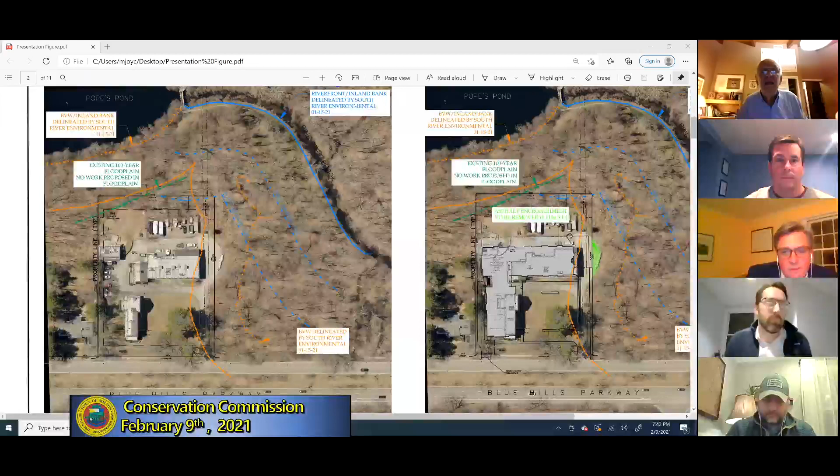We don't see anything, or I don't see anything. It should be popping up in a second. Hold on, how are we doing? Coming up, it's coming through. There we go, yep. Oh perfect, good, okay.

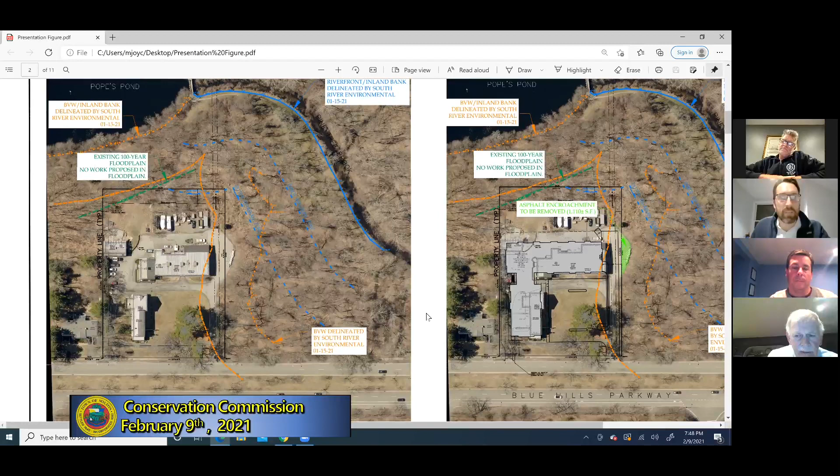You're all night, right? I don't know whether it's Michael or John, but can one of you respond—this isn't necessarily a resource area question—do you know what the groundwater elevation is on the site? So we did perform test pits out on the site. The groundwater elevation...

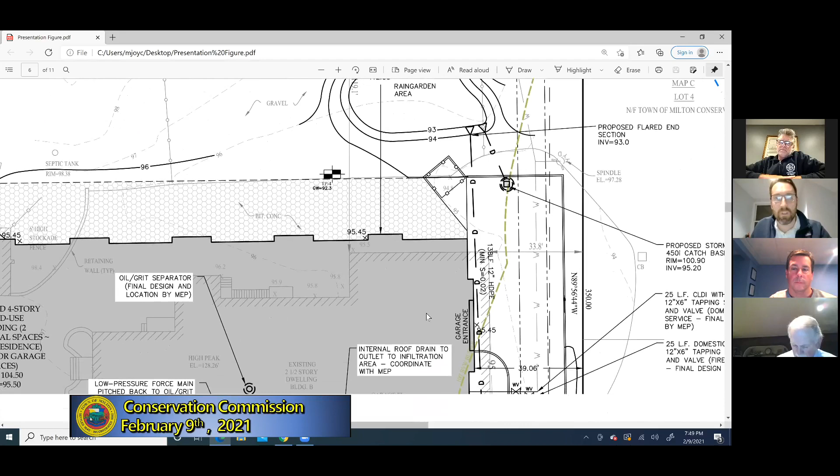It varied pretty significantly depending on where you were on the site. For example, in the back it was elevation 92, about 4 feet below grade, at the rear of the property. Closer to the street, it was roughly between 4 and 5 feet below grade. Actually, it was fairly consistent in the test pits we performed.

So that's those test pits there that we're looking at, the box, the hatched target looking areas. We performed 4 out there, 3 in the front and 1 at the rear of the building.

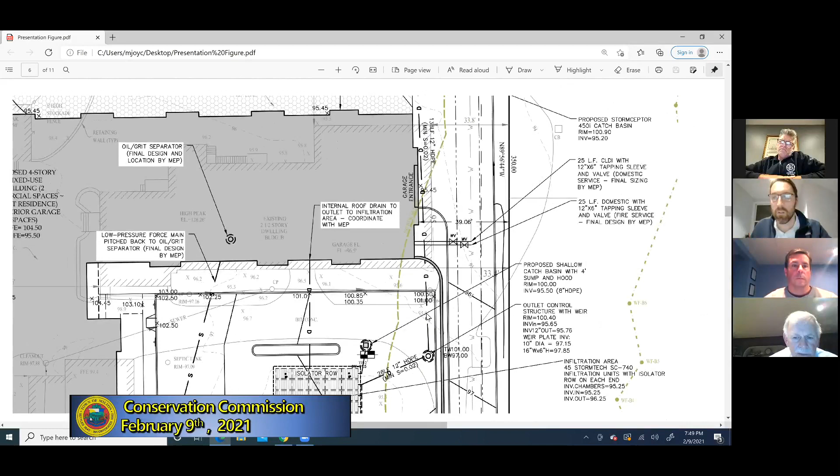If you like, I can give you a narrative of going over what's proposed and what's existing from an engineering standpoint, and the work we're doing in the buffer, if that's okay with everybody. Sure, yes. Excuse me, do I remember there was a hydrological section in the document?

Yeah, so we did do a full stormwater report. We're running in parallel with our notice of intent application. We are also in front of the Zoning Board of Appeals currently. We've had 1 hearing with them, and we haven't received any review from the engineering department or a peer review yet, but we're anticipating receiving those in the next couple weeks. But we did do a full stormwater design, which I can touch on as we go through the presentation.

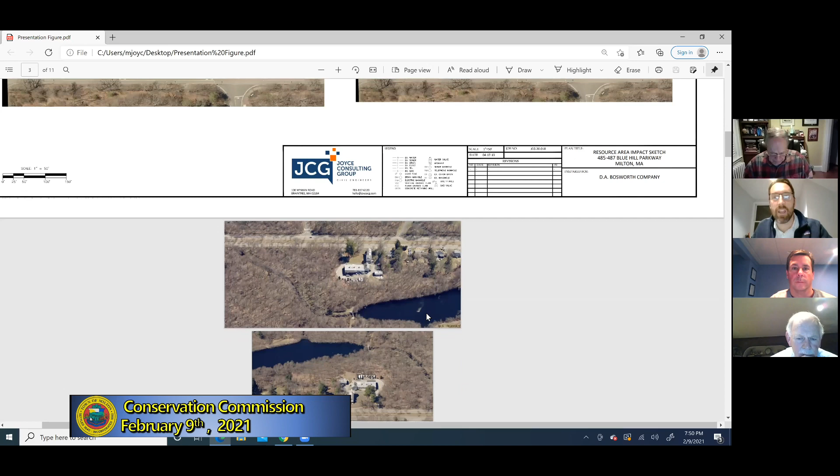It's Appendix C, I just relocated it, the hydrological model. Yeah, they're pretty much at the end of the application there.

As Scott and John touched on briefly, with the existing 2-acre lot at 485 Blue Hills Parkway, there's 3 existing buildings on the site. The site also has driveways surrounding the existing buildings. There's 2 access points from Blue Hills Parkway, one on the northern side, one on the southern, with driveways surrounding the buildings. The site has a high point at the front of the site, and it gradually slopes to the northwest corner.

There's no real existing stormwater improvements, with the exception of a catch basin to the northwesterly corner. It's a leaching catch basin, it doesn't really provide much value from a stormwater management standpoint. The stormwater flows over surface and then ultimately ends up on the conservation land associated with Pope's Pond and Pine Tree Brook. There is one residential abutter to the south, and then the remainder of the lot is abutted by the Milton Conservation Land and Blue Hills Parkway.

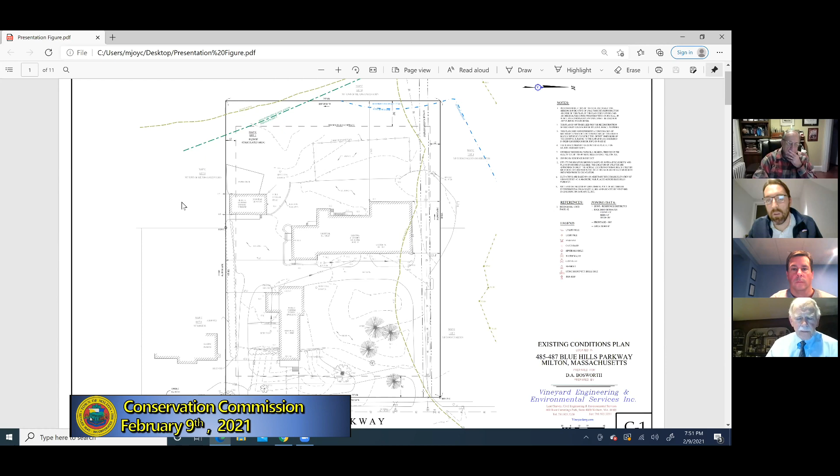So I have a few pictures. Well, you saw this one here. Can you provide some detail on the existing uses?

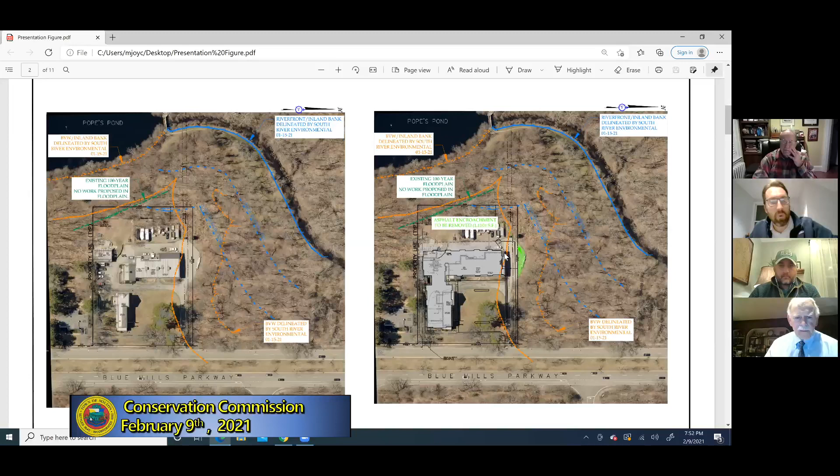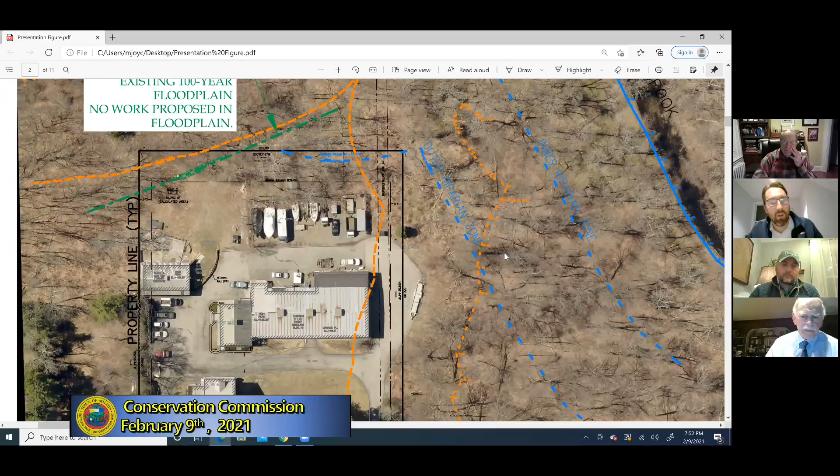I can provide not much background. There are residential buildings there, and then there's a large warehouse to the back. This is the warehouse here. It's my understanding that it used to be an ice warehouse back in the day, where they used to take the ice from Pope's Pond, bring it and store it in the existing warehouse, then throughout the summer transport it to residential dwellings for their coolers, refrigerators, so to speak.

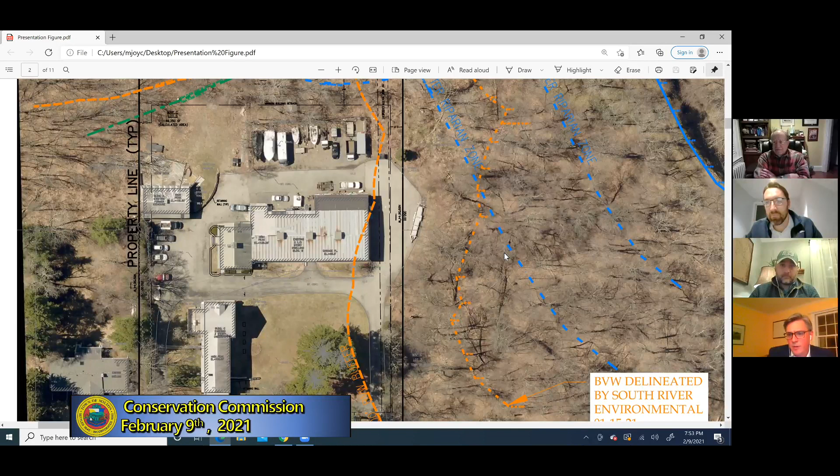Ice boxes, exactly. So at current day, I believe it's used more as a storage for equipment. Scott, I'm not sure exactly, do you know any more about the use of the site today? I know in the past it's been used as a residence, and I don't know. I know there has been residential use. Charlie, maybe you could chime in on that. I'm not exactly sure what it's currently being used for.

Yeah, the building that's closest to Blue Hills Parkway is still being used for residential use, although there's only a few people in that part. The large old barn is storage at the present time. The building to the left of the barn used to house office space. That has since been vacated.

In the building to the rear left of the property is an old pool house that was, the best we can tell, constructed sometime in the late 50s or 60s, but there's not a lot to it. Now, the barn, the garage, although there may have been some transportation of ice out of that barn, was strictly used for carriages and equipment to move the ice around the town. The actual ice house itself was adjacent to Pope's Pond, essentially on the bank of the pond, to the west, a little bit south, and it was a much larger building, well over an acre in size.

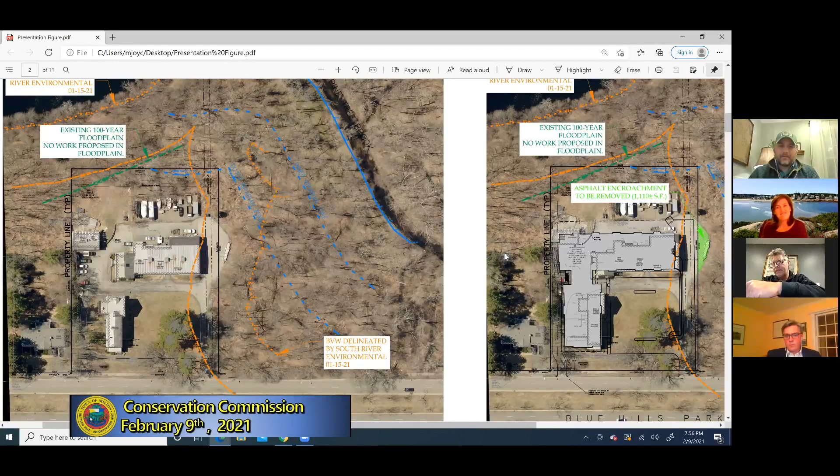Sorry, I have some background noise. I apologize. Is anyone else having trouble hearing Todd? I am, I can't hear. It sounds like there's background noise. Yeah Todd, it seems like there's something wrong with your audio. Honestly, I wouldn't have even known you were talking if your name didn't pop up on the screen. So to continue, my apologies.

No oil or hazardous materials issues or the need for that you've identified? We have not identified anything. There's the heating systems for the buildings themselves, but we haven't found anything below ground.

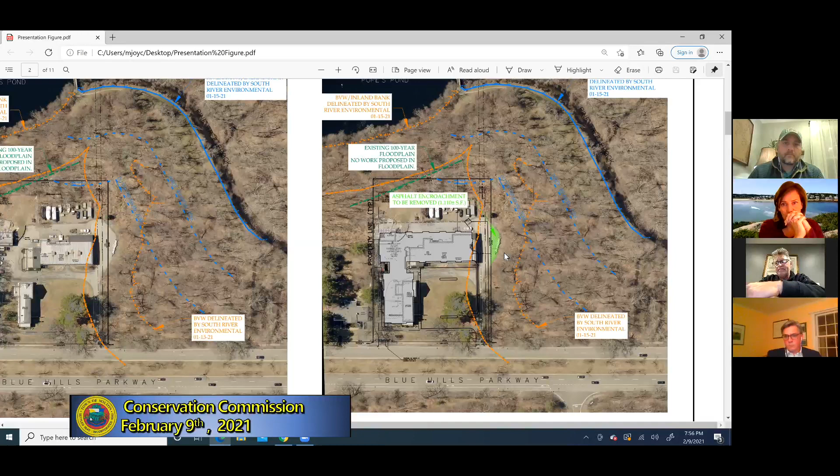Hans, do you recall when we were out there most recently, probably a year ago or more, at the back building? I know there were a lot of fill pipes on the outside, they looked like oil fill pipes, separate ones. You remember that? So I do, John. This is Steve. Yeah, I remember fill pipes. You and Ingrid were there, and then I think we were there in twos - I was there first, then you and Ingrid came. I think I was there with Judith. And I just remember there were fill pipes at the building, and I didn't know if there was any kind of a 21E floating around that had been done at any point in the past.

But there was an oil company there, wasn't there? The McKeans ran their trucks out of there for several years, John. I think it must have been 10 or 15 years anyway that they ran their vehicles out of there.

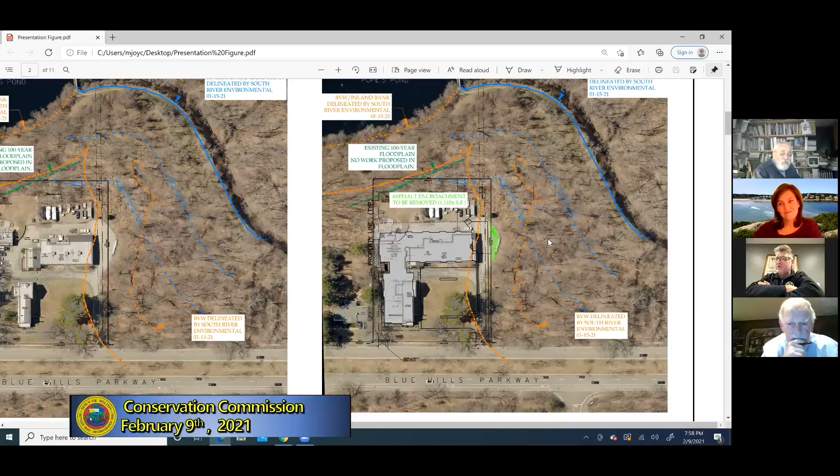I haven't seen any oil fill pipes that would fill underground tanks, if that is what you're suggesting. There are pipes on the outside of the building that fill the inside tanks, but we have no plans and no evidence of underground storage tanks, if that's where the suggestion is the fill pipes are going. Yeah, no, I was just on the outside and I saw the fill pipes, so I have no idea what's inside, whether it's above ground or below ground. I don't have a clue.

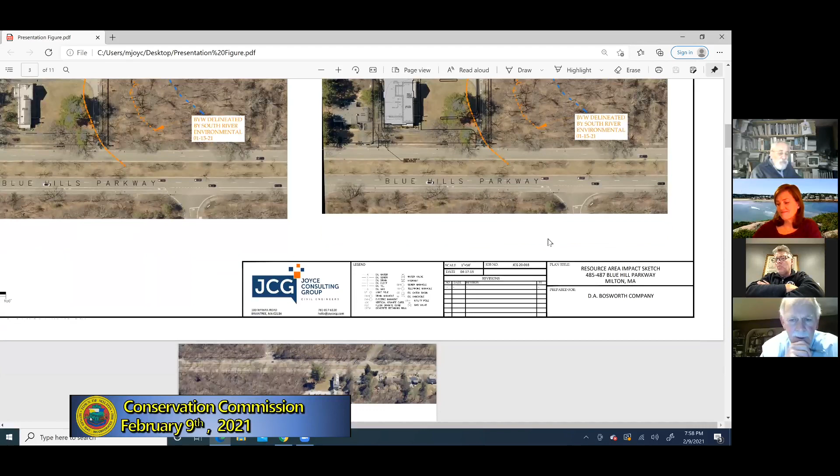Well, the tanks inside the rear building - there's several different heating systems in the barn, at least 3 separate heating systems, so they have 3 separate tanks at the barn itself. And how big are those tanks? I didn't measure them, John, but they appear to be typical 110 to 220 gallon tanks, your typical residential oil tank.

Okay. Actually, typical oil tanks are about 275s. Okay, then I guess it must be 275's, Steve. I know I have one, that's why.

If I can take you back, the concern with potential oil contamination would be significant because of the water issues. One of the reasons I asked about the groundwater elevation was because I was interested in the detention pond, which would be at the northeast side of the site. I didn't know whether or not the groundwater testing, the borings - I haven't read in detail what the borings looked like, but my concern is whether or not the detention basin as designed would be sufficient to take the runoff as it's depicted in the plans.

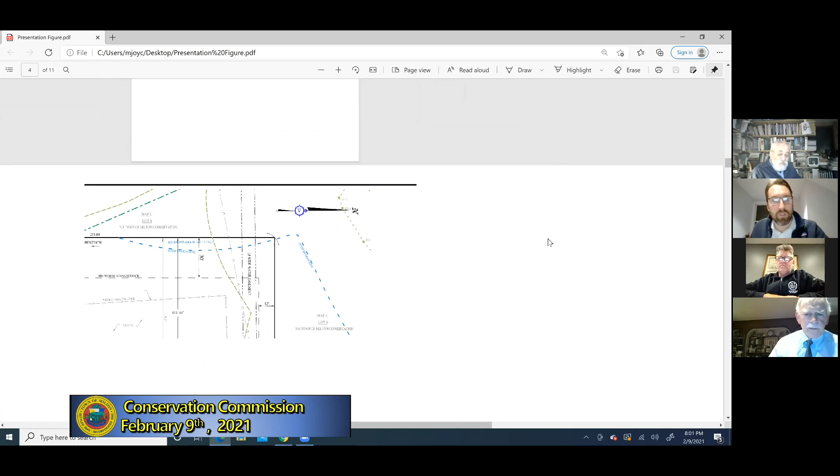So what we're proposing is to construct a 52-unit residential building. In addition to the residences, there'll also be 2 commercial or retail units at the front of the building. The proposed building will have 2 separate parking areas accessed through the same northerly curb cut that's existing. There'll be parking in the upper area, and a driveway that accesses a below-grade garage level entrance holding 34 interior garage spaces. So we'll have 2 separate areas of parking, one above and one below, both accessed by this curb cut off of Blue Hills Parkway.

The driveway will basically follow the same path as the existing driveway. However, there's this encroachment of asphalt that goes over the Milton conservation land. That'll be removed, and the driveway will be pulled off of the property line, about 4 feet off at the front of the property and 7 feet off at the rear. So that asphalt will be removed from the site, about 1,100 square feet of it.

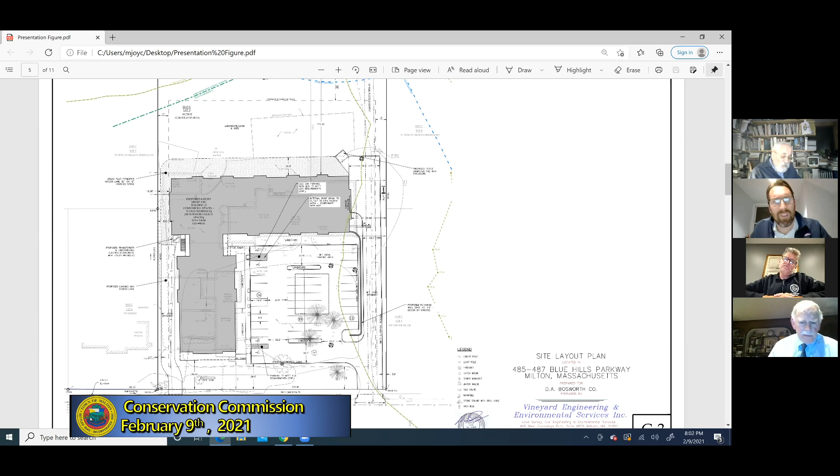So in order to design the site, what will be the setback after it's pulled back? It'll be about 4 feet from the property line at the driveway and about 7 feet back at the rear of the driveway. So that is proposed.

I'm sorry, I thought you meant that other than the encroachment, that's what the existing condition is, but that's the proposed condition. It pulls back - you can kind of see that the edge of the driveway runs, existing is kind of where the cursor runs, and it bumps out pretty good. I imagine there was just creep over the years of the trucks swinging around the garage. They probably took the turn wide, and historically that driveway just kind of expanded as it was being used.

So can I interrupt and just go back a second to the parking? You said 34 interior spaces below grade, right, and how many exterior spaces? There are 34 interior, I believe there's 43 exterior spaces.

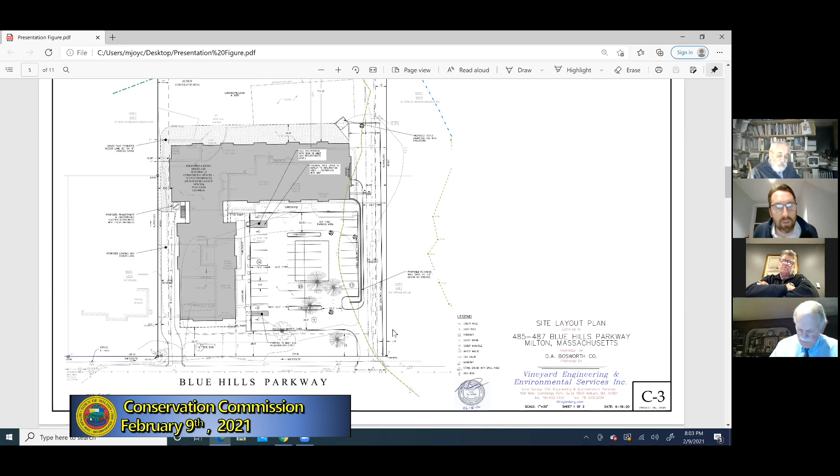All right, and the interior one, what's the bottom? I mean, how deep are you going to go? So the proposed garage slab will be approximately the same as the existing garage slab, about a foot lower, so it's more or less the same elevation that's existing. We're trying to work with the existing grade as it slopes to the rear.

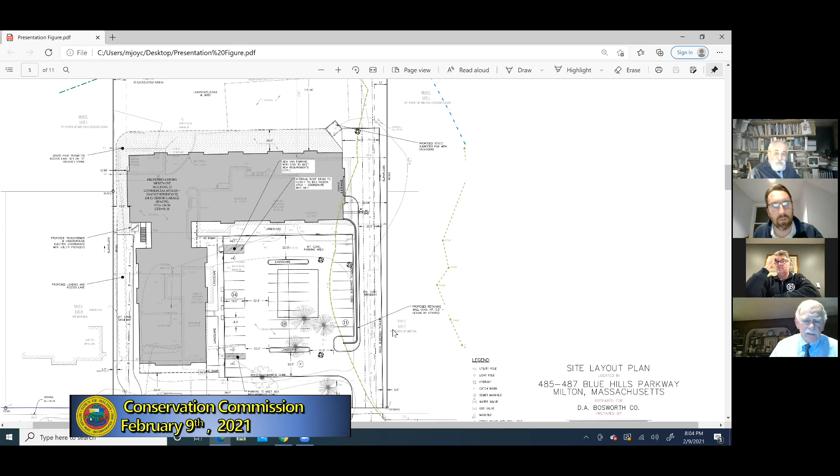So there'll be garage under, but only in the portion that's parallel to the street - the L portion of the building that's parallel to the street, there'll be garage under on that. And then as you move forward, I believe there's a half basement. Is that right, Charlie, on the front?

Well, the portion that heads towards Blue Hills Parkway, that's full basement, but it's residential basement, meaning some of it is for the commercial space. And then the other area will be for mechanicals. So you'll have parking essentially going from north to south in the L, and then east to west, that section of the building will be for mechanicals and for storage for the commercial space.

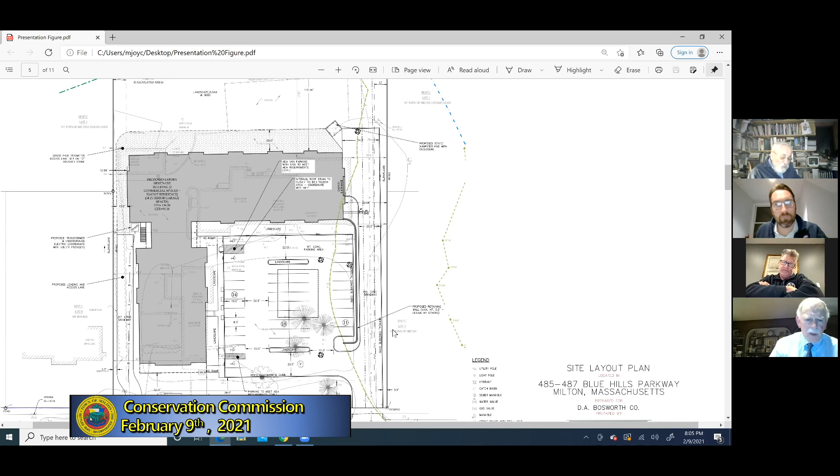Where is the commercial space? I know you said front, but I don't know whether you mean front closest to the parkway or front as in facing the parkway. Right where he has the cursor, John, we have 2 commercial spaces going right in the front of the building. Understood, thank you.

And how big are the commercial spaces? I believe it's about 2,000 square feet total between the two of them, 2,500. Yeah, we're about 2,400 combined. Now, it may end up being one commercial space, but it's cut into two right now in the design.

Are they both at ground level? Yeah, so they will be at the elevation above Blue Hills Parkway. So Mike, can you pull up the elevation in front of that building? If you can just zoom in on the front of the Blue Hills Parkway side.

You just mean on the plan here? Yeah, so the elevation - you'd come off Blue Hills Parkway, and Blue Hills Parkway is around 100, I believe, and finished floor is roughly 104, 105. So it's about 5 feet higher than Blue Hills Parkway.

Okay, and what type of commercial do you anticipate being in there? Well, that's a long way off, but our hope was that we would have some sort of gourmet coffee shop, sandwich shop, gourmet small market type of thing. We have spoken with at least one interested party, but quite honestly, that was before we got hit with the COVID mess, and I think it would be premature to promise anything until we know how this all ends up.

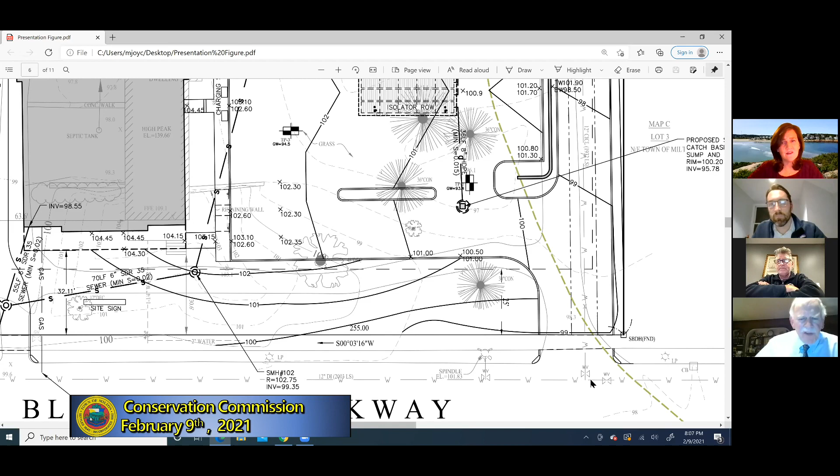Of course, but how do you figure your parking? Are you relating it to the 52 residential units, or are you relating it to both the residential units and the customer population for the retail outfits? This commercial space is so small, John, that the estimate is only to need 4 to 6 spaces at most for the commercial. So it's not really a marketplace as we would think of Milton Marketplace - it's a coffee shop, gourmet sandwich shop type of thing.

And how many parking spaces total are in the lot? We're roughly 42 in the lot, and I think we're in the 30s in the basement, Mike, right? 32, 34 in the basement. 34. Okay.

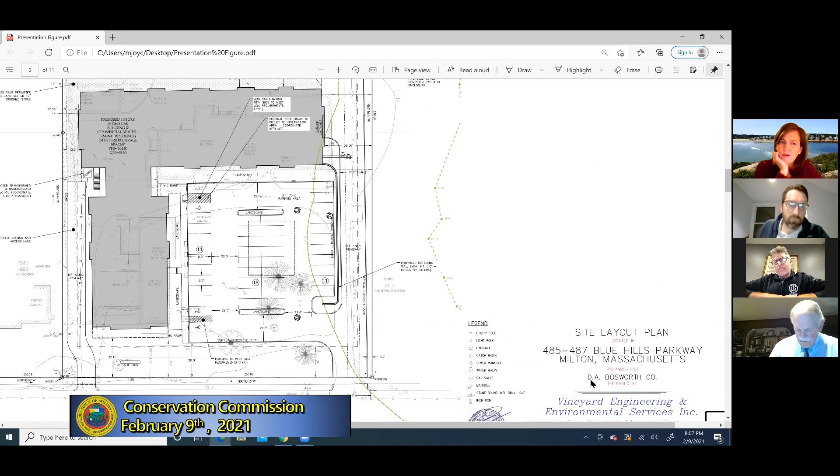And we have charging stations in the exterior parking location for EV vehicles.

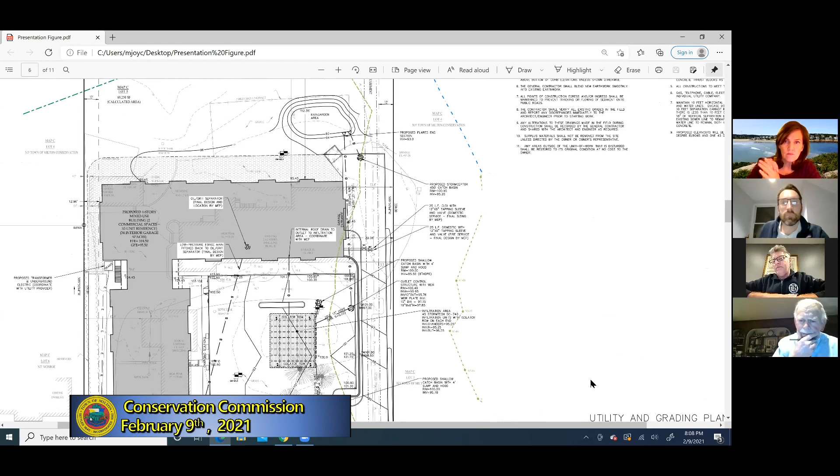Oh, cool. So is the number of parking spots compliant with the planning board regulations? Well, this is a zoning board approval process. But we have worked with the ZBA and the planning board, or the select board, and with Mass Housing on the volume of spots.

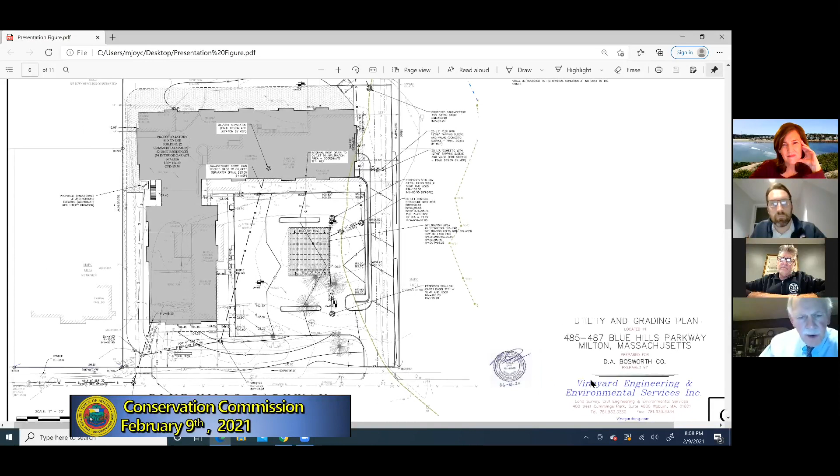Yeah, that's a concern, because if you get pushed on your parking, you're going to have more impervious space. Right. And my concern is you've got 77 spots, if you're 34 interior and 43 outside, that's 77 parking spots for 52 units. And then where do the 4 to 6 go for? And 4 to 6 doesn't sound like a lot of parking for 2 retail outfits.

Are those 4 to 6 allocated to the retail spaces? Are they part of the 77, or are they in addition? Correct, they are part of the 77. We have the option to increase the parking under the north to south wing, the east to west wing, if required.

And where does the snow go? Well, we have a lot of room around the back of the building, the east to west portion, for snow storage. Will that have to be taken from the front and then moved to the back? Is that correct? That would be the assumption.

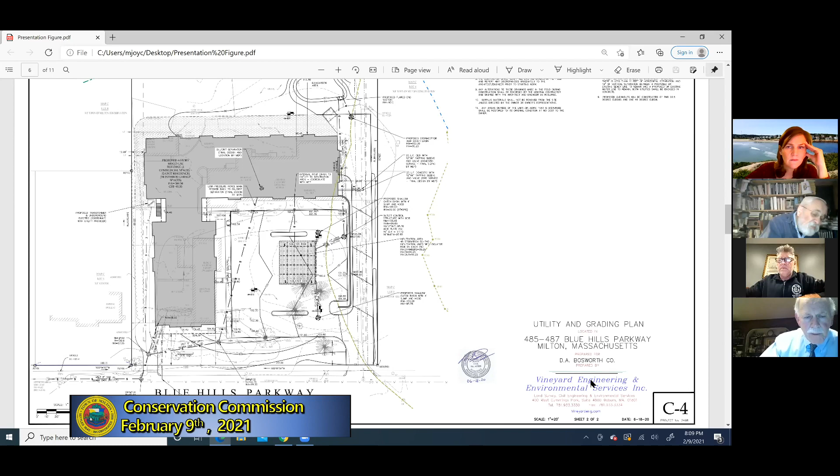Is there a reason why there's no parking behind the east to west wing? No particular reason at this point. If we had to increase or get some spots from back there, there's plenty of room.

But this parking volume count is something that we've worked with for close to a year now. So to be clear, on the back of the building, you're actually reducing the impervious area there, right? Yeah, if you noticed from the aerial views, there's the hard packed gravel area in the back here. That's all going to go away and be loamed and seeded under this plan.

Like Charlie said, there is the ability to potentially put parking in the rear here. I think we were trying to minimize the footprint and preserve some green space, but there is the opportunity if need be. I think there's been a lot of behind the scenes work that Charlie's done on parking, determining a number that they think will fit the development with Mass Housing.

I don't know if this is always true, but I feel like a lot of times in our designs we have a tendency to over design the parking, which is kind of a shame when it comes to open space and that sort of thing. But that's obviously not always the case.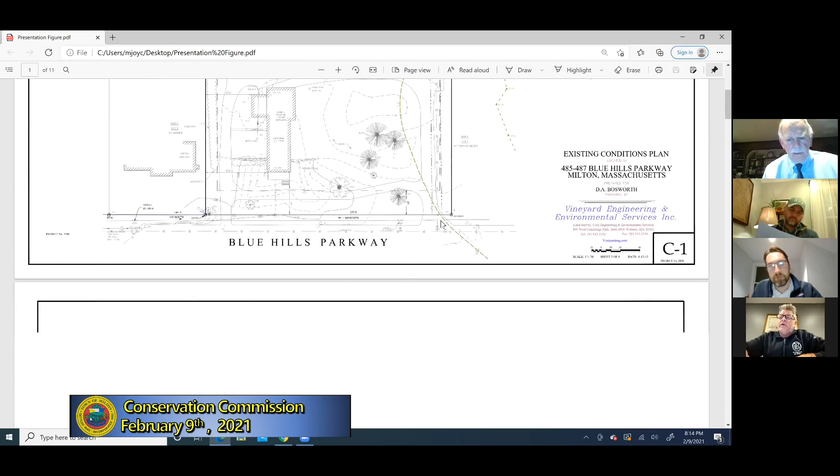What we would propose with another NOI. So Mike, stop where you are there. So along the Blue Hills Parkway side, the north property line, the first half heading east to west belongs to the Town of Milton. It is not governed by conservation. The second half of the run going east to west is governed by conservation, and the rest of the run out to Pope's Pond is also governed by conservation.

But when you say governed by conservation, are you talking about ownership? It's owned by the Conservation Commission, on the town's records. Correct. I just wanted to distinguish between deed ownership as opposed to jurisdictional. I'm speaking strictly to ownership. One side is the Town of Milton, the east side, and the west side is owned on record by the Conservation Commission, out to Pope's.

What we would propose, and this will be in a separate NOI, but for informational purposes we can discuss this. The north property line, the first part essentially owned by the Town of Milton, we would propose improving, come to the east a little bit Mike. That area there, we would propose parking for town residents and anyone that wants to walk out to Pope's Pond.

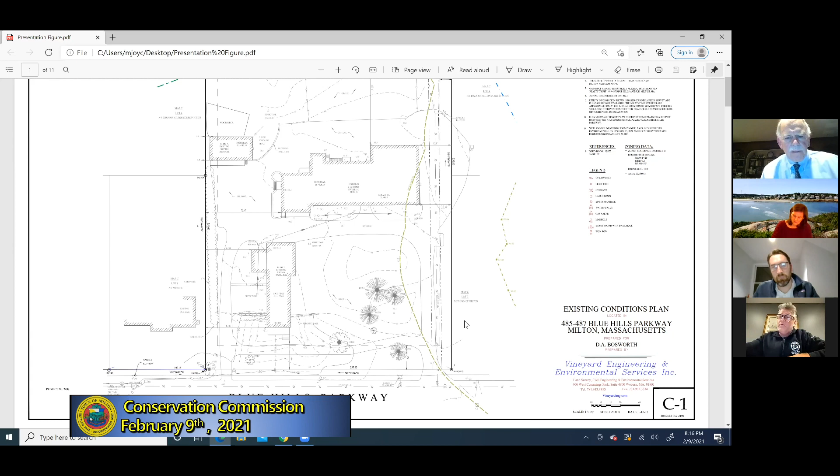Improve the easement off our property line, from the west property line continuing west to Pope's, on top of the water easement, removing the invasive species and improving a walking path out to Pope's Pond where the bridge is. On your property over the easement, or on our property? Now that's conservation, I know, that's owned by the conservation.

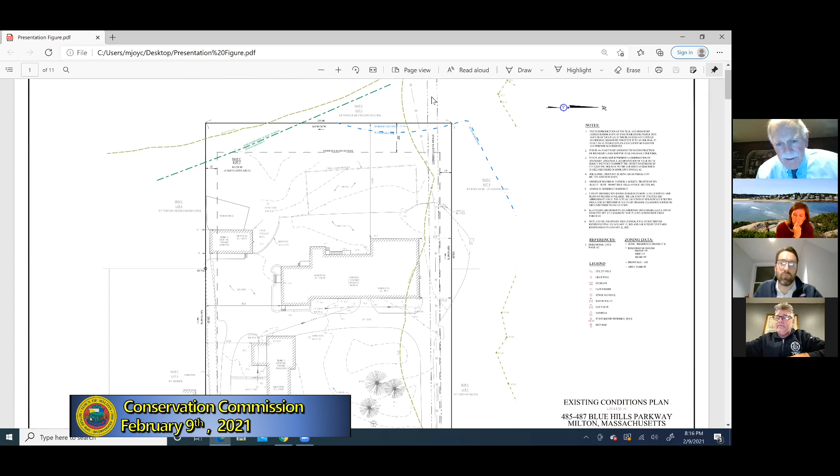So we would propose in a separate NOI to improve that water easement. Speaking with the other town officials, the access to that easement is precarious at best at this point. If there was ever a water main break, they'd have to go in and rip all that up anyway.

So what we would propose is to create a walking path from the west property line, somewhere in there, on top of the water easement, improve the water easement, make it a walking path. And what we envisioned were that residents could come and park in the parking that's on the east side of the project, on the town land, and get a sandwich or coffee or just take a walk. Then they could walk down the driveway to the walking path and access the pond.

That seems smart. You need the town to build the parking, or maybe you're going to do it. No, we're willing to do the work on our land, on the town's land, conservation and the town. Would you maintain the parking spaces as well? Yes, we would, in the same way that you maintain the rest of the parking on the property. Yes.

So just so I'm clear, because we all know there's a walking path that abuts the Pine Tree Brook that's currently there, but you're talking about a walking path on your land, on top of the easement. It sounds like that's where you want it to be. Exactly. Where Mike has the cursor now is where we'd be proposing the improved walking path, because once we build the proposed driveway, we're improving on top of the water easement.

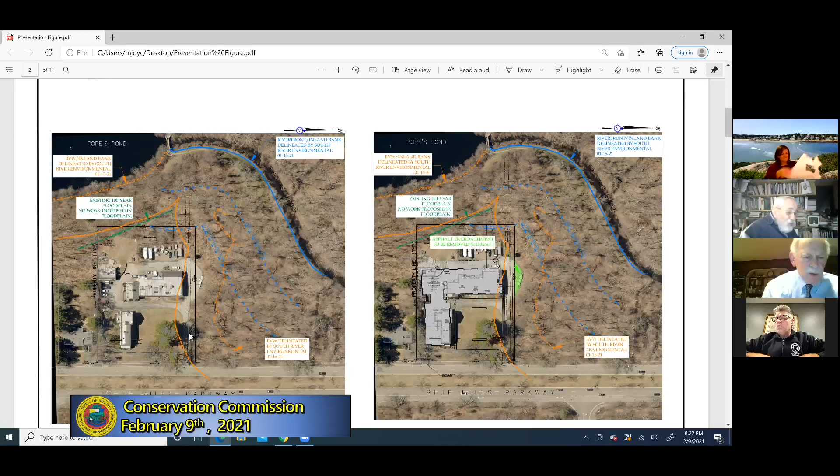It was my understanding on the first project proposed by the same owner—and I know Charlie's the developer, but the McKeans are still in the application—it was very clear to me and the Conservation Commission, at an informational session, their counsel was very articulate in saying public access would be provided through the property. It sounds like you're using an easement to provide that access, but part of that access is public parking, and you need to put the parking outside of the proposed site. That looks like you're using somebody else's land to facilitate that public access. Always my understanding would be part and parcel of whatever the building project was.

Well, I think part of the challenge for many people who have looked at the project is they've been educated on a previous project, and this is nothing like the previous project. It has no significant relationship in any way to the previous project. The previous project was essentially commercial space with some residential above. This is just a very small commercial space—think of the old Bents—in the residential. Question: why couldn't you put the public parking back there at the southwest corner?

So, not to interrupt, but I almost feel like these are kind of separate conversations. I know they're linked together, but recognizing we'll have an additional NOI filed for this access and parking area, is it possible to move ahead with this application and address that at the next hearing? I don't want to step on anyone's toes. Actually, I would like you to answer me—why not the parking at that southwest corner?

There's no way we're going to separate this into two NOIs, approve one and hope for the best in the next one. Right, public access is tied directly to this application. Exactly, that's how I feel about it. That's why I asked the question, John.

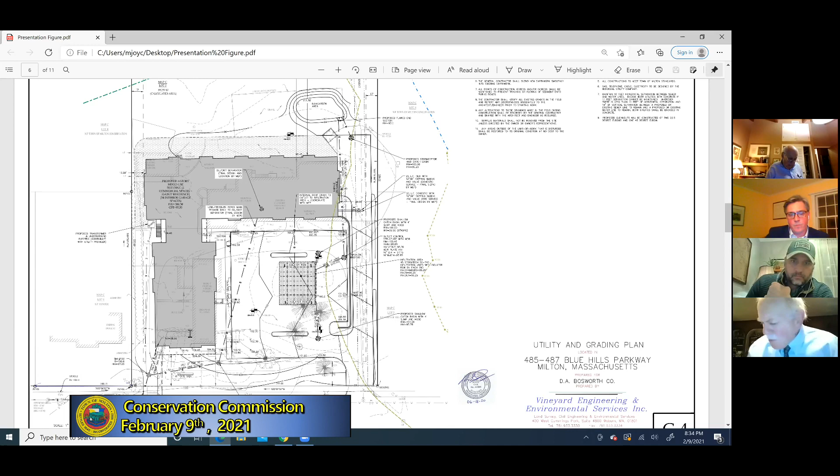Can I ask, it may be a little off point, but there was one thing I noticed in some of the plans. I saw the existence of trees implicated. I looked at page 6 of your narrative, 6.1, and it says the project area will be cleared of one shrub. That doesn't seem to match what I see in the plans, which show, at least in current conditions, some big trees out front. And in the plan we're looking at right here, it looks like a lot of that's going to be turned into parking areas.

Yeah, you're absolutely right, there's a typo in the report. There will be, actually you can see on this plan here, about 5 trees that will be removed within the parking area, and those I think are the only trees that will be removed. They're a mix of scrub, mainly scrub pine. There are some large ones. There's been a couple that have come down over the past couple years, and some that needed to come down because they haven't been in the greatest condition. But those trees in the parking area would have to come down.

All right, and I had another question as well. Under 4.2, you talk about temporary erosion controls of staked straw wattles. Then on the next page, 6.2, it says silt fence and hay bales. It seems to be inconsistent, and I didn't know if that was intentional. Yeah, the intention is to use staked straw wattles along the downslope side, as shown in the erosion and control plan, the demolition erosion and control plan.

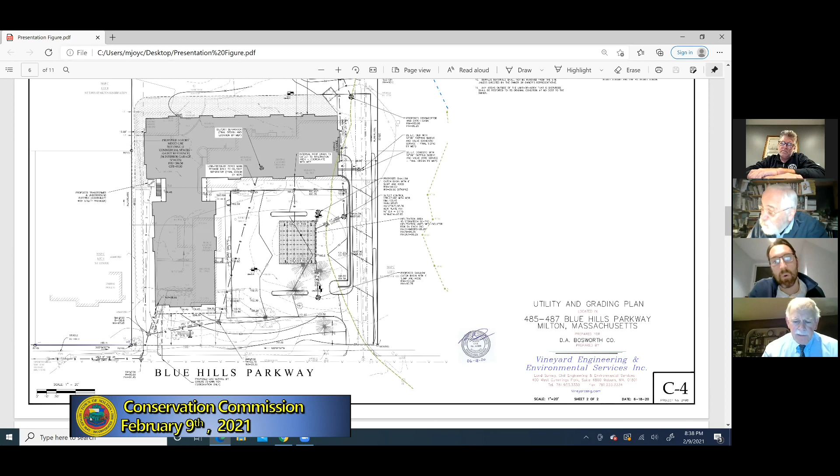Let me run through the drainage real quick while I have this sheet up. The proposed parking lots will be collected by deep sump catch basins located in the upper parking area, directed to an infiltration system with isolator rows. In addition, the rooftop will be collected and directed to the isolator rows. That infiltration area will overflow via 12-inch HDPE pipe out to the rear of the property to a detention area. During large storm events, that will overflow and surface flow to the conservation area, similar to how stormwater flows now.

During all storm events, the runoff will be decreased for the 2, 10, 25, and 100-year storms. There'll be infiltration within the Cultec chambers below the parking lot - 45 SC740 chambers are proposed below the parking area. The driveway area that accesses the garage will be collected by a Stormceptor catch basin, treated, and overflow to that detention area as well.

The work within the buffer area really consists of the proposed driveway. There'll be no proposed work within the flood zone or the riverfront area. The proposed impact to the buffer is an increase of approximately 150 square feet of impervious area throughout the whole buffer. With our proposed project, the stormwater that's now currently untreated running off the site will be treated.

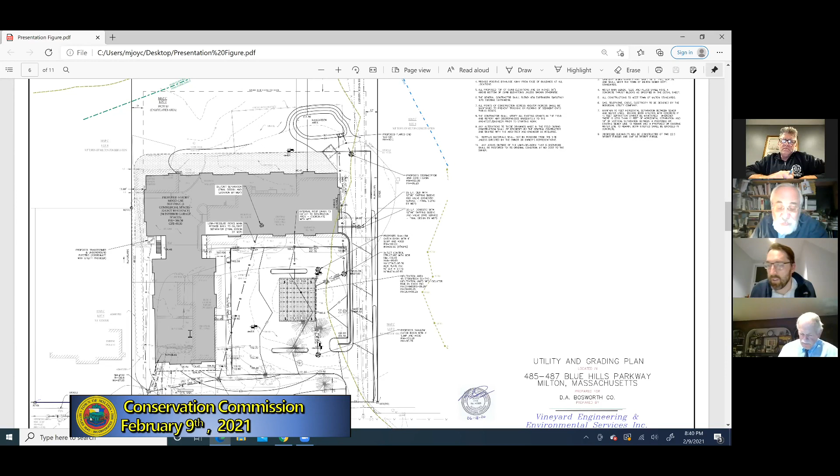That's really the extent of the stormwater. In addition, we'll also be connecting to sewer. Currently there's a myriad of septic tanks and cesspools out there - they'll obviously be removed, and the proposed project will be tied into the sewer system, providing benefit as well. So that's really, from a stormwater standpoint, what's proposed - I wanted to get that in before we got too far off track.

If there's any questions on the stormwater system itself, I'd be happy to answer those. There's a catch basin off property - is that going to be left as is? I was assuming that would be removed when we remove the asphalt, but if you wanted it left in place, that's fine. So the assumption was that it would be removed at the same time as the asphalt, or if not removed, filled with crushed stone and covered up - whatever the commission prefers.

Following that, section 5.1 has a statement that says the project complies with the performance standards of the Wetlands Protection Act for work proposed within the resource areas and buffers. That's all it says - I'd like to have that section expanded. Which values and functions, and which standards are you talking about, and how are you going to address them? That's a normal thing to do. Right now the performance standards discussion is just a statement - how do we know that statement's correct? Tell us, give us some detail for each one of the performance standards.

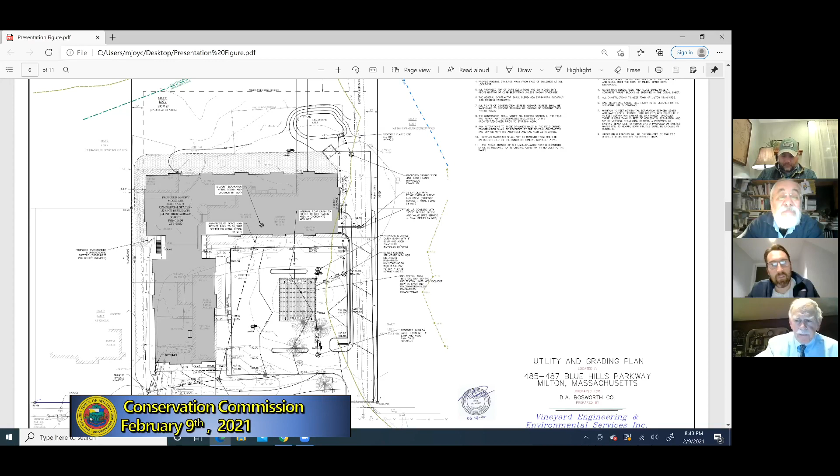I didn't model it, but I'd have to take a look. The rain garden there is more of an aesthetic feature. We may not even need it, but I think it was something we wanted to offer as an aesthetic feature at the rear of the property.

Have you considered moving the rain garden to the front of the property so it could be viewed by the public? We did consider that early on. I did have one at the front, but the only problem is it's the high point, so there's no real good way to get stormwater there. Initially we tried grabbing stormwater from one of the catch basins at the front and directing it to the rain garden, but it wasn't working from an elevation standpoint, because the elevation drops off towards Blue Hills Parkway as well.

Mr. Joyce, are you familiar with the rain garden in the center of the parking lot at the Milton Public Library? I'm not, but I can certainly drive by it. It seems to me this site would be a wonderful opportunity for something just like that. Yeah, I can certainly take a look at that. What I'm envisioning is replacing the stormwater system underneath the current parking lot with a center island rain garden.

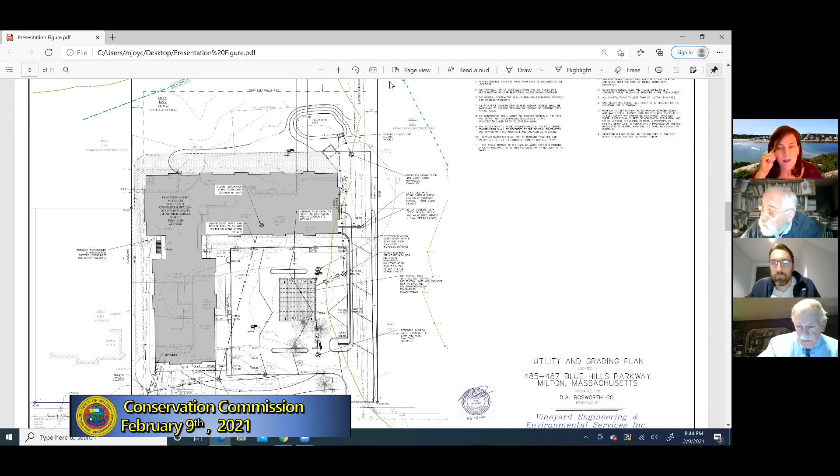Which would then become a landscaping feature as well as a stormwater management tool. And to replace the loss of parking that the rain garden would take up, maybe put those spots behind the east-west wing of the building. Yeah, that's something we could do.

I'm going to ask a question, not a leading question at all, I'm just curious why you have no parking in the back. It may be because it's right next to a beautiful natural resource, Pope's Pond. Honestly we haven't explored putting parking back there, because with the work Charlie did up front, we felt we had enough parking for the proposed use.

But that, like you said, was refreshing to have a little more green space than you usually see at the back of a development property. There certainly is space back there that could be utilized for parking if we feel it's needed, and it's not a steeply sloped area, so there's nothing really there to prevent placing something there.

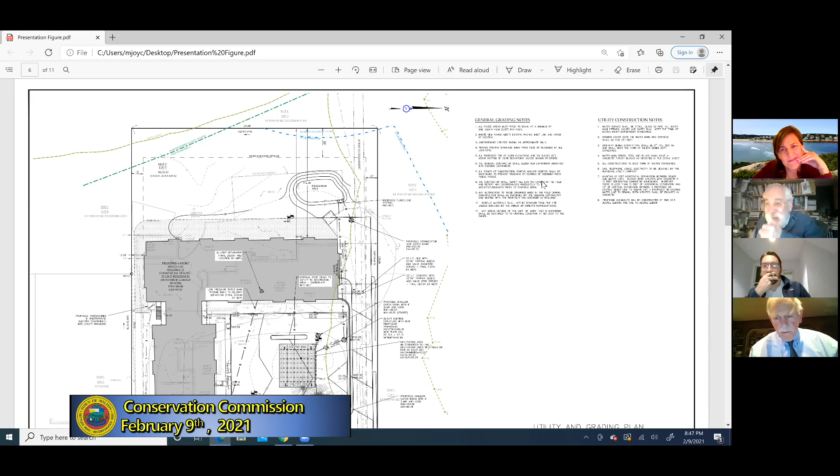It would be very consistent with the intended design of the parkway historically. I'm sorry, what was that, Arthur? It would be very consistent with the intended design of the parkway. Absolutely, this is a parkway to the Blue Hills, it's always, since the outset of the design, been environmentally oriented. And that's a beautiful congruence that you put forward.

I just have visions of hordes of high school students walking down the hill after school lets out, walking in and getting a sandwich or a cup of coffee, and then walking over to the pond from there. And if we can maybe educate a little bit along the way, well, isn't that great?

All right, good points. How do we move this along? I don't mean to cut you off, Michael or Scott or John or whomever, but what's the next step, or what more can you tell us about the project that we should know, and then what are the next steps?

I don't know if Michael has anything else to address. We're currently awaiting our peer review responses. Some of the issues brought up this evening are going to be subject to the ZBA review and approval process, so we're waiting to hear back on that. I assume we'll have those pretty soon. I know there were some comments on the application form and some cleanup that probably needs to be done, so I would assume Mike can reach out to Steve and hopefully work through some of those issues.

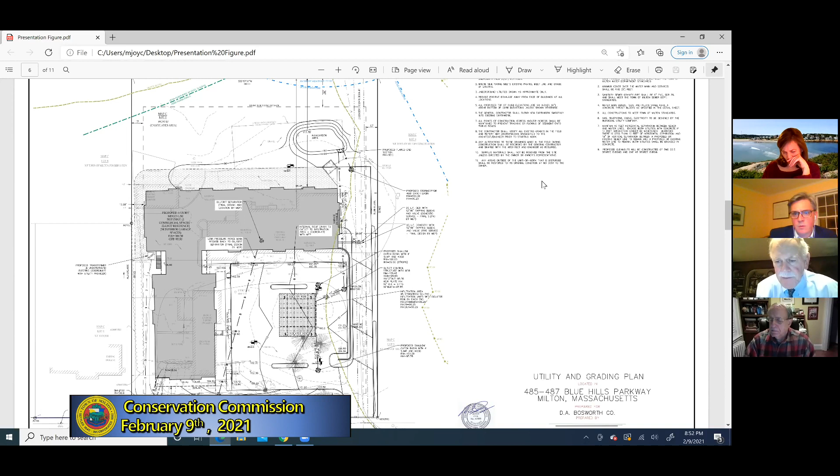I'm not trying to slow it down at all, that's a point of pride for us. We're not trying to delay anything, but it may make sense to get 2 months worth of information and the ability for us to get out and see the flags. What makes sense to you? I'm not pushing for that, but I'm just asking what the consensus is as to the most efficient continuance date. Go ahead, Scott. Oh no, go ahead.

I was going to ask kind of - I guess this is just my, Charlie, cut me off whenever you want, but I almost feel like if we could get on the next agenda and then potentially continue, if we're supposed to be getting review comments from the peer reviewer. Sorry, I'm just looking at my calendar here - within the week, I believe we're on the February 23rd agenda for the zoning board, is that right, Scott? That's correct, yep.

So we should have some information next time the hearing comes around about how the project has changed or not, the guidance we've gotten from ZBA and even the peer review and engineering comments. So we could have a significantly different project in a month, looking at least. That's fine, and if we don't, we could request a continuance prior to the meeting, if that's okay with you. Yeah, that makes good sense. Steve, what's our March date? March 9th. All right.

So are there any other questions or comments from commissioners? I'll wait to see if there are any. And then I should ask whether or not there are any comments or questions from members of the public, abutters, or any member of the public. Hearing none, with the assent of the applicant, we will continue this until March 9th at our next meeting. Good? Thank you. All right. Thank you very much. Appreciate it, thank you for your time.

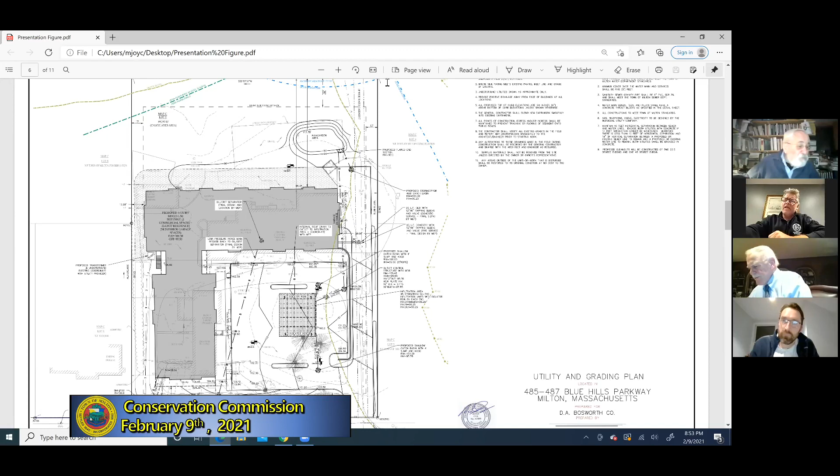Thank you. All right, we're back. So we're now having reversed the agenda, we're now back to number 1 on the agenda, which is Milton Academy, Gun Hill Street. And I'd like to share the screen. Can anybody see that? No? Uh-oh.

I see that Greg Huckmuth has joined us. Okay, thank you very much everyone for putting us on second. Oh great, I'm glad you're here. Sure.

Is anybody at the Milton Access TV? Yeah, hi Steve, you have permission to share, so make sure you have the window open that you want to share before you hit share screen. Well, I did. Let me go back and cancel that. I've got to cancel some tabs here, Mike. Okay, I've got one thing open, but then I don't see share screen. Okay, that's my issue, I don't see.

If it's helpful, I can try to share the plan on my screen. Yeah, well I should be able to do it from here, Mike. Mike Lynch, yeah, it should be at the bottom of your screen, Steve. The share screen would be... oh wait, hang on, share screen. I think I've just found it. And I'm hitting it and nothing happens. Yep, share screen. I'm glad I'm not the only technologically challenged individual.

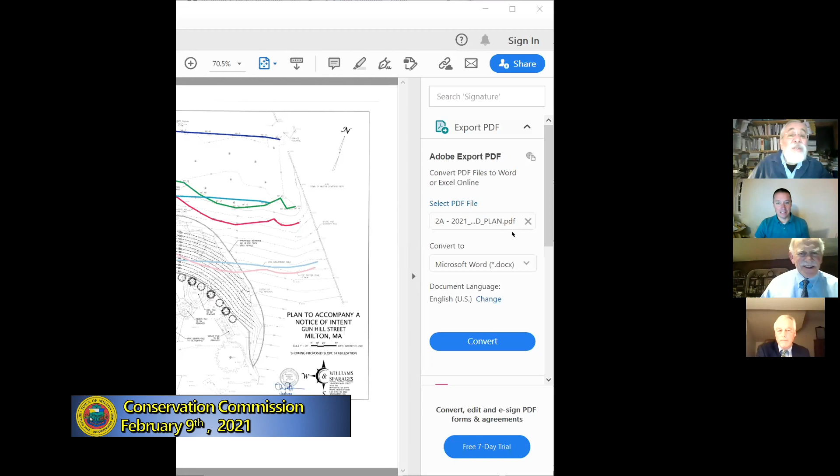Hey, there we go. You're making progress, there you go. There, all right. Am I, can you see that? Yes, I take back everything I said about technologically challenged. You're doing great, Steve. Okay, we're getting there, we're getting there. I'm gonna move this away, try to move this over. Why can't I move that over? There we go, how's that?

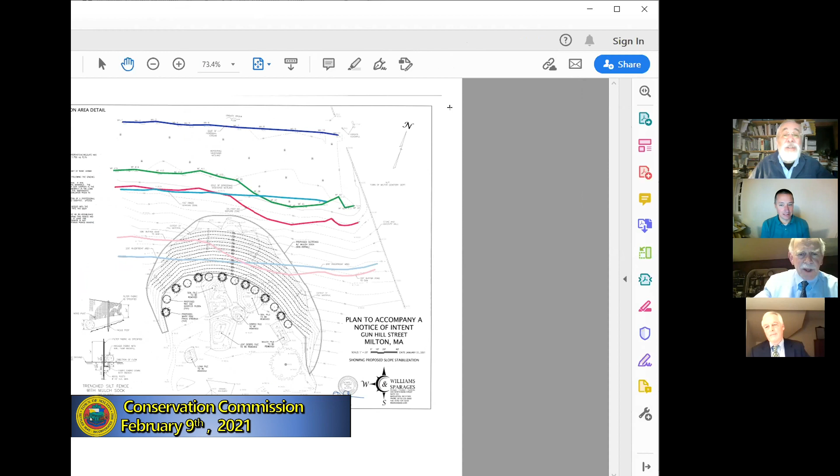Wonderful, okay, great. Yes, Mr. Chair, I have to tell you, I started a hearing several weeks ago with the Board of Appeals, and there was a problem with the computers at Town Hall, and nobody was monitoring the raise hand function. I had my hand raised and was never recognized because nobody was following that. And my cell phone blew up with clients asking, where are you? Why aren't you talking? So the joy of Zoom is really quite something.

True enough. Right, well thank you, Mr. Chair. Ned Corcoran, attorney in Quincy, live here in Milton, representing Milton Academy. I'm joined by Greg Huckmuth with Williams and Sparages, who's our wetland scientist, Brandon Fagan, who's a licensed site professional, I think has a lot of experience with this board, and Nick Parnell from the Academy.

We're here, I think, as a continuation of the enforcement order that was filed, as well as to start a hearing on the notice of intent, which was filed relative to remedial plans that we have submitted to the commission for consideration relative to remediating the issues around the slope as it heads into towards the riverbank for Unquity Brook and the wetland.

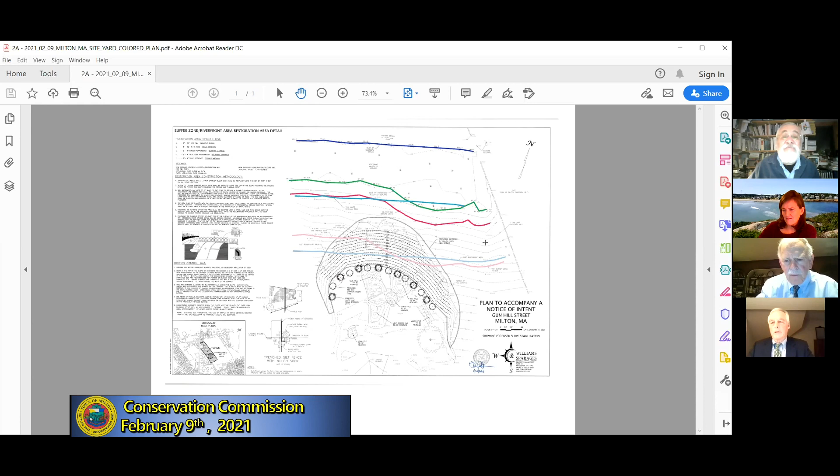It's pretty good for a lay guy. And it's interesting that the 100-foot wetland setback line and the 200-foot riverbank setback line really sort of merge with each other. They parallel each other and then cross each other in the middle. And those obviously define the limits of this commission's jurisdiction relative to activity.

This is a site that has a long history, as we've discovered. Milton Academy has owned this property for a significant amount of time. And the plateau, if you will, which is sort of the top of slope coming to the bottom of the screen, has really existed there for quite a long time. Our research indicates that has been there since at least the early 1990s, if not before.

And the area to the south, the bottom of the plan, is area that the Academy has used fairly extensively, and I know with not 100% popularity, to conduct maintenance activities associated with its bigger campus. It's a large campus, as you know, not a lot of area on its campus to store materials or spread materials. They have lawns, fields to mow, trees to maintain, and they use that area to place and then either create mulch or do other activities.

Over time, the slope as it exists from the top, which is outside the jurisdiction of the commission, down the hill is approximately a 1-to-1 slope, fairly steep, and has been there for a while. It has begun to show signs of stress, particularly with organic materials degrading and sloughing towards the wetland. That's an issue brought to our attention by this commission, and the Academy is paying careful attention to it and has a strong desire to work with the commission to remediate as soon as effectively as possible.

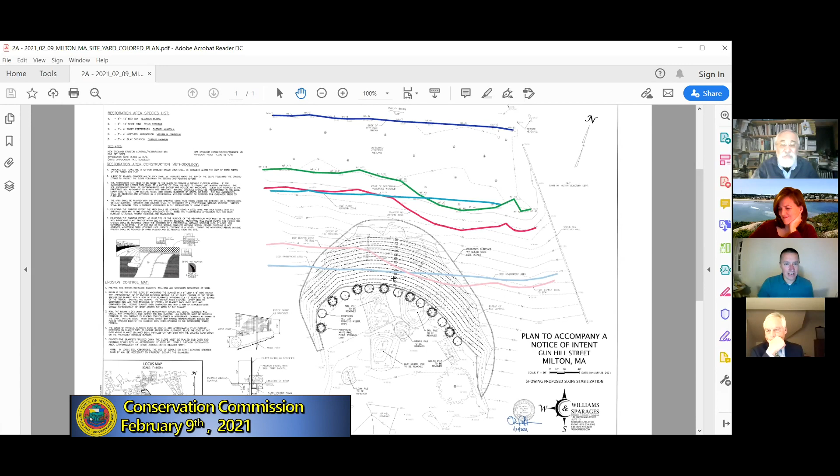It served as a reminder for maintenance crews not to go close to the edge, no more dumping, no more stockpiling, no more staging. I can show you a picture, an aerial photo from 2014 that I have on my screen that might be helpful. The only problem is I just tried to share the screen and it said this will stop other screen sharing. Let me try that. So can everybody see that?

The problem is this slope is even closer now. The decomposition taking place along this edge is really what we're here to talk about, and hopefully try to rectify, because it is within your jurisdiction. Right now there's no imminent threat to the down gradient resource areas, but if something's not done to this slope, it's going to continue to be a problem, and eventually you're going to lose big chunks of it. And as soon as that happens, now you have fines and other material migrating into the resource areas.

So you say fines, you mean fine materials? I'm sorry, when you say fines, you're referring to fine materials? Yeah, really just silt and clay. The silt and clay that would be in the soil have a tendency to move with the water. They stay suspended longer, and you really don't want a lot of silt and clay getting into the resource areas. Anybody that's seen a mud puddle dry up, what's left is just this shell of silt. That's what we're trying to avoid.

I'm going to stop sharing and go back to a different plan, which is Steve's. Let me see here. Greg, if I may, I might want to take you back to that last picture. How are you referring to that? So that's just a 2014 aerial photo. Okay, good, thank you.

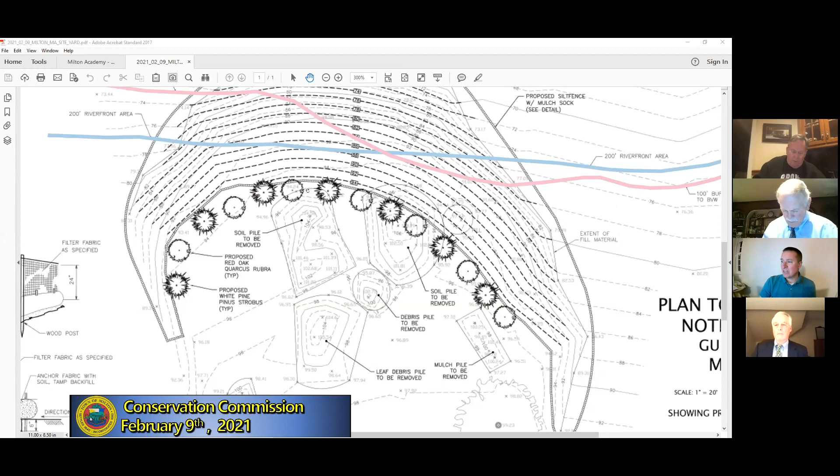So this is the plan that Steve had up earlier, and I'm going to draw on it. I'm just going to annotate where the, let me pick a color that you didn't use. So this line that I'm drawing, can everybody see that? Yes. That is roughly the top of the existing slope.

What we need to do is start at the bottom and pull that slope back so that it's uniform, not one-to-one, so that we can provide a suitable planting medium to establish a good vegetative base. In this case, it would be a slope stabilization mix containing native grasses that should do really well out here. But in order to accomplish that goal, we have to start at the bottom and pull the grade back. We're proposing, instead of 1-to-1 which it is now, to bring it to 2.5-to-1.

3-to-1, I think, is too flat. 2-to-1 is still pretty steep. 2.5-to-1 will still allow for some decomposition and still, hopefully, at the end of the day, have a suitable, stable slope remain above the resource areas. Once that's done, we're proposing to install an additional row of erosion control. Let me just grab a different color here.

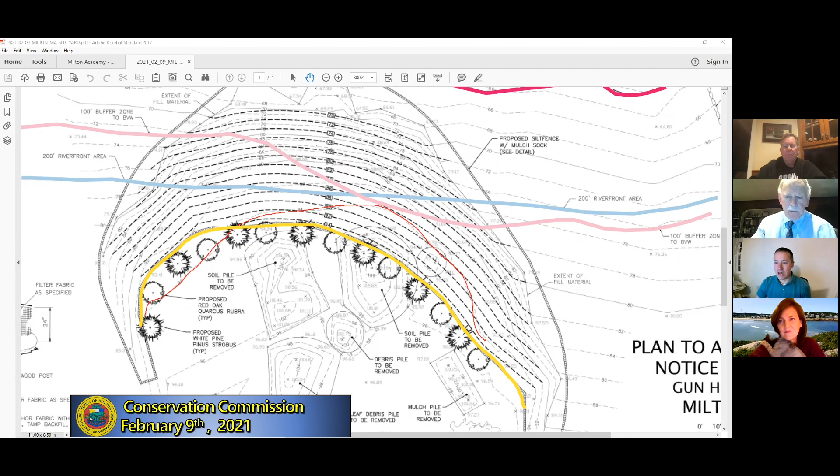I think it's premature to just scatter a bunch of letters on this slope and show the commission where we're hoping to plant things. I think what makes more sense is when the time comes, if Steve's willing, to meet me out here and the two of us just pick the best spots to put these shrubs. We're proposing a few different species, and we can certainly modify that list. Let me just erase some of those lines.

So I'm proposing sweet pepperbush, northern arrowwood, and silky dogwood. I did see them growing down in the existing vegetative buffers, so I think they'll do well here. They tend to like to have their feet wet, so that's something we'll have to take into consideration depending on what we have as our planting medium. If it looks like it's going to be too dry, we might have to modify the species.

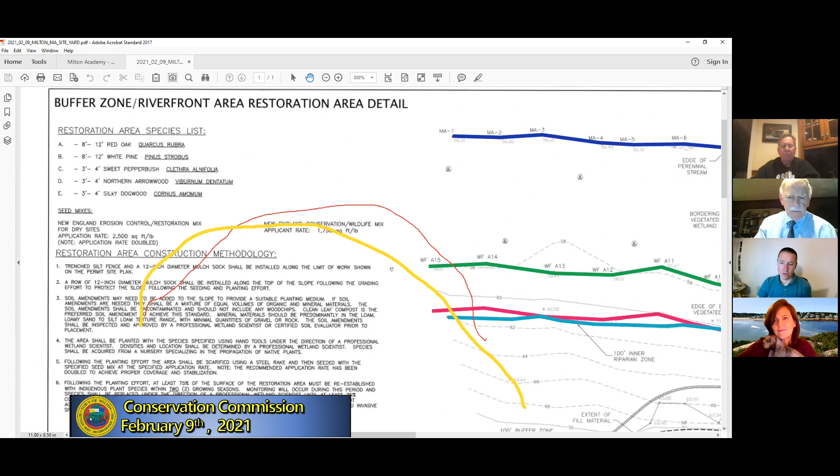But the net result we're hoping for here is a stable slope covered with herbaceous growth that we're able to plant with native shrub species, and then just leave it alone. Once that's done, on the area on top we'd be proposing a series of white pine and red oak trees that would line the top of the slope to serve as a permanent vegetative barrier to prohibit anybody from going towards that edge with anything moving forward.

These trees would be well outside the riverfront, so even if Unquity Brook does swell a little bit, we've got ourselves probably about a 20-foot cushion before these trees even come into the riverfront area. We know that brook's having issues even right now—when you go down there, it's probably quite flooded, the culvert's underwater, and there's something going on there.

So as part of our plan, we try to take that into consideration and give ourselves some wiggle room, because what the school wants to be able to do is still utilize this area, but make sure all activities are outside of your jurisdiction moving forward. So the long and short of it is: stabilize the slope, set a 1-to-1, 2.5-to-1 grade, vegetate it, put up a barrier, and then just leave it alone.

We finally got a file number from DEP. I'm not sure why it took so long. There were no comments, at least as of yet. We're not mapped as estimated priority habitat, so we didn't have to file with the Division of Fisheries and Wildlife Natural Heritage Program.

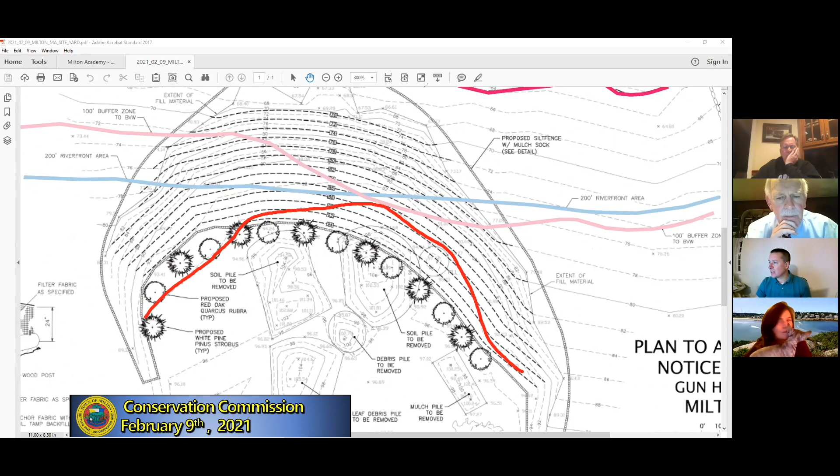And then what are you doing at the bottom of the slope? So at the bottom of the slope, we're proposing to install erosion controls. And then, let me just pan up for a minute here—really, this line that you see here, this kind of jagged line.

What I did is I met the survey crew out there and walked them around, saying take a shot here, take a shot here. Those shots represent areas where Ned had mentioned the debris had started to slough and get to the bottom of the hill. This is just material that can be raked up—you could go out there with a rake today and rake that up—but we're going to have an excavator out here, so they'll carefully take the bucket and scratch this material back.

There's less than a foot of material down here, that's why we don't show any finished grades in this location. We're just going to carefully remove that under the direction of a wetland scientist, keep the erosion controls in place, and then dust that with a conservation wildlife mix.

There were some areas with trees, not marked here, but most of us were out there, probably to the center and right, where trees were clearly two or three feet of fill up from the roots. They're clearly going to die if you don't pull that back. I'm not sure exactly where those trees were, but it seems like it's more than just sloughing off. It looked like fill had been placed there over the roots of the trees, maybe a couple feet up.

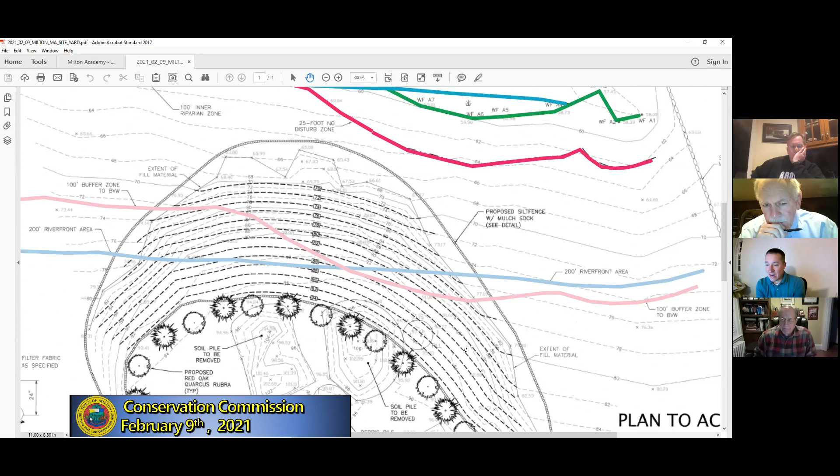We're fully prepared to put new trees in to replace them. But I think the location of those is going to largely depend on what we find as we're removing this material. We may find that some of that fill, especially up in this area, is new enough that we can carefully remove it and salvage those trees.

But certainly all of the trees that I observed down in this location, most of them look dead already. I've done projects like this before, and even though you're still seeing leaves and growth on the trees, as soon as you start to remove this material, you see that the tree itself is just gone.

Isn't that the result of the fill? Yeah. So, that jagged line you said you were going to pull out—that was going to be relatively easy. But what about pulling back the fill all the way to the pink line, the jurisdiction line from the BVW? Yes, that line right there. What about pulling the fill back and getting back to original elevation?

Well, I think the problem you're going to have there is you'll have a 10-foot drop in that location. So you'd either need to put a retaining wall in, or the new top of slope would be way back here. That would be a very large amount of material that you'd be removing.

What we suspect happened out here is that long ago, somebody created this platform to make a suitable staging area for the school, probably even before there were regulations governing wetlands. Then over the years, material was just pushed over the edge to make more room and keep it flat. So I think what we have is a dusting of organic material over a very suitable base.

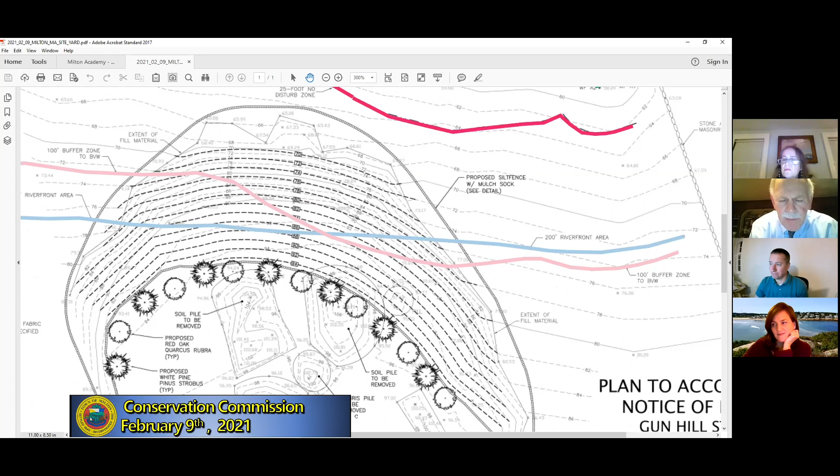Now, the trees we're looking at here in that semicircle—is that existing condition, or is that proposed to plant those there? These are all proposed, white pines and red oaks.

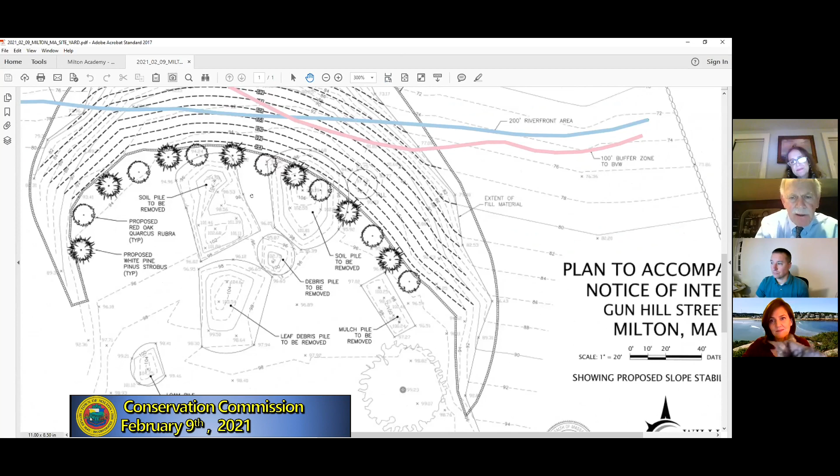So if you took out the proposed ones—and I know you showed us a photograph and said some of those trees didn't make it, some of them did—but if you took that line of trees out and moved the top of bank back, would that allow you to pull back all of the fill, at least up to our jurisdictional line, the pink line? So just to put it into perspective, the elevation right here is 94. And if I come across parallel, the existing contour here is 78.

It's a lot higher, you know, to remove this from material that's been added. A lot higher from material that's been added. So it's non-native material, but right.

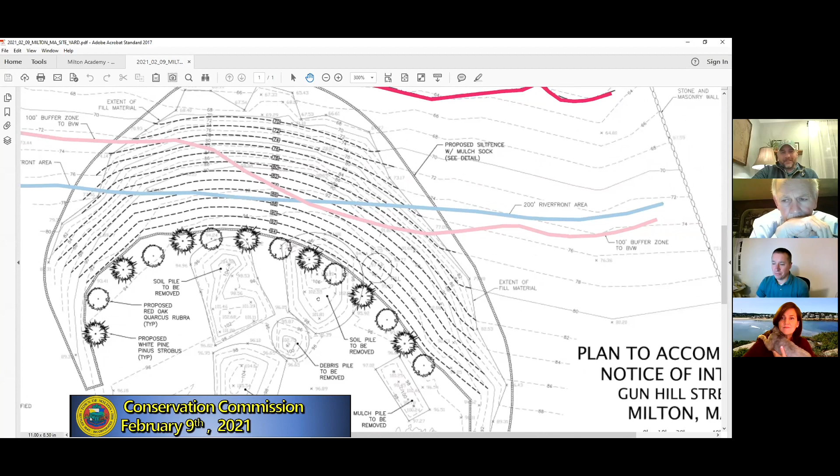And we've been like, it's always been there. Well, I think to some extent, regulatory wise, it has always been there. I think it's been added to over the years for sure, and that's what we're just not sure of. We've been doing our best to talk to people at the school to try to get a clear understanding of when the initial, I'll call it a plateau, was created. And we're not quite there yet.

We know it was before 1990. And I know after 2012, no additional material was dumped beyond the pine trees that were planted. But the gray area is when the actual plateau was created.

I've seen, it may be a little unusual, but it might be a good idea. I see that Marvin Gordon is on the call tonight. And as a neighbor, I don't know if he's technically abutter, but it's pretty close. Mr. Gordon, can you give us any history of this site? It might be helpful to the commission.

I can give you some history of it. Would you do so? That would be helpful to us. You're addressing that to me? Yeah, yes. Okay, well, let me.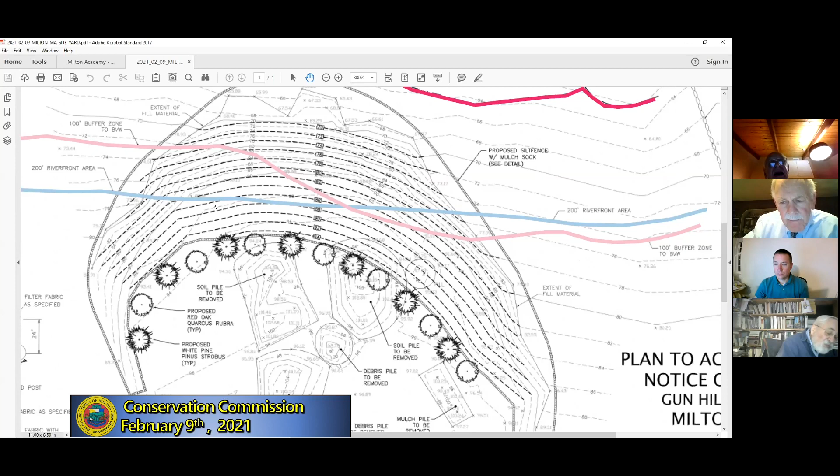What's the time, when Anne Marie Fagan became the executive secretary, I had a meeting with her and one of the executives of Milton Academy, and a commitment was made not only to have plantings but there would be no additional filling.

There would be, you could use it for temporary storage for landscaping materials and so forth, but there would be no additional filling. I can tell you from looking at the property for 30 years that a lot more material's been filled in there, a lot more than when the commitment was made to Anne Marie Fagan and to Kevin Murren. So this is a string of more than 30 years of broken promises.

And you can see by looking at this very plan that's on the board right now, the loam leaf pile, mulch piles, and so forth aren't just temporary storage. Those were there as dumping spots.

And on top of that, which doesn't show here, is that for this year, even this year, this site has been used for the temporary storage of uncovered salt to be used on the roads of Milton Academy.

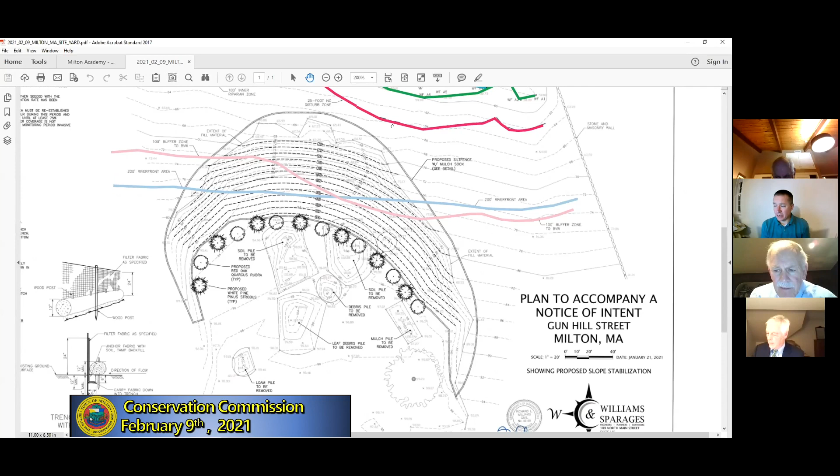Yeah, I didn't observe any salt. I've been out here on numerous occasions, but I certainly haven't observed this site as long as Mr. Gordon. Sure, no, I understand that. And Nick, I confess I don't know how long you've been in the position - I don't know if you're aware of any salt storage in this area.

Nick Parnell? Are you asking Nick? Yes, I was. Ned, I was asking Nick Parnell. I don't know if you... I think, no, I don't recall any of that, and I've been here five years. Right, yeah, that's what I thought, Nick. I didn't know how far back you went. Nope.

So I do have - Milton Academy was audited by the EPA. This goes back almost 15 years at this point, under Kevin's work. There were significant discussions about managing salt across the academy and the property because of the salt risk to wetlands, and salt storage areas were identified in hardscape. I'm not aware of any areas or use of salt outside of those areas of the academy. It was a significant issue from the stormwater control point, and specifically with EPA, because the audit was done on five different levels, including OSHA and RCRA conditions.

I'd be very surprised to hear that there was salt used by Steve Zanino in those areas, because there were numerous meetings related to it.

Brent, I appreciate that fact, but I thought the audit was about where the salt was being used, and Mr. Gordon was referencing where it was being stored. No, it has to do with storage specifically.

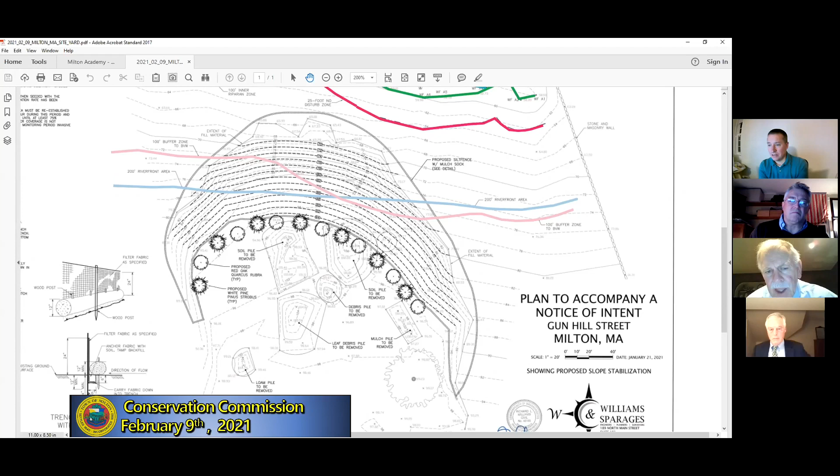But even looking at the 100-foot line, is there any reason why we shouldn't ask to pull it back to that line? Well, I think you brought up a couple important points there.

I think it sounds like from Mr. Gordon's testimony that the bulk of the fill material was brought to this location in the early 90s. If that was the case, the Rivers Protection Act didn't come out till 1996, as you just pointed out, so the riverfront area probably didn't exist when the bulk of this work was done.

Based on my observations from doing the wetland delineation, in the location shown on the plan here, where the buffer zone really kicks up on this side, yes, there's a pretty broad transition zone down here. I think it's more than likely a result of the water backing up at this culvert. It's probably been doing it for some time, so the wetland edge is probably pushed out a lot further than it probably was even in the early 90s.

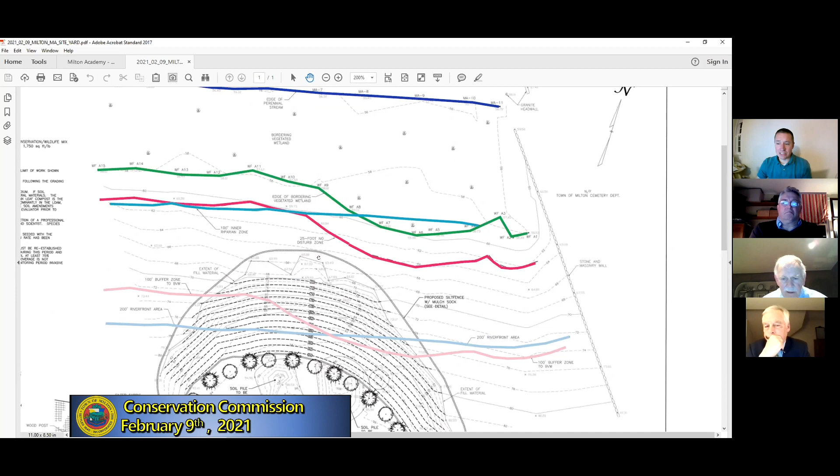Of course, all of this is speculation. But even if that was the case, I still think you would have had a good chunk of this material within your jurisdiction, though it probably would have been pretty close to the outskirts of the buffer zone.

All right, but I guess what I'm asking is really a feasibility question, as opposed to whether or not you should do it. Could you pull it back—I'm looking at the pink line, which is the 100-foot mark, not the blue line, which would be the Rivers Act—but what would happen to the top of the slope? How far back would you have to pull the top of the slope, where the proposed trees are, in order to pull all that fill out up to the extent of the 100-foot pink line there?

Yeah, so we'd probably be out here now with our new top of slope.

You know, I think if this was going to go that route and the commission said we want all this material out, or we want you to test it to prove that it's okay to stay, I think at that point the amount of work involved just to take some scoops out and find where the original surface was - at that point it would probably make sense just to pull out some additional material and move the top of slope back. That's something I'll have to discuss with the school and the team to see what that would all mean.

We were under the impression that the material was there a lot longer than 1990. Certainly if that was the case, there'd be a much stronger argument for it to stay. But if it was there as late as 1990, the Wetlands Protection Act and regulations were clearly in place at that time, so that certainly changes things. Now that we've learned this new information, I think we need to discuss it as a team.

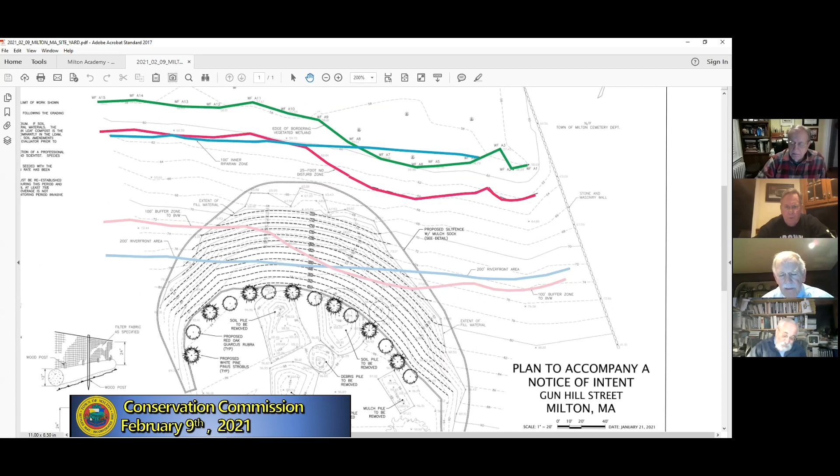Greg, would you bring up that 2014 picture? I can, I have to stop sharing first. Let me see if I can pull that back up. I may have to call it up again - just bear with me for a minute.

All right, and that was 2014. Yeah, there it is. Let's see, screen share. Can you see it there? Yes.

Now let's bring it to the edge where you see the pile. Right here, and that tree right there. What's the distance - do you have an estimate of the distance from the top of that to what was the natural topography without this fill? Because I observed it looked like almost 10 feet when we were there. I'm sorry, I'm not sure I understand the question. I don't either, Jerry. Is that a vertical distance you're looking for?

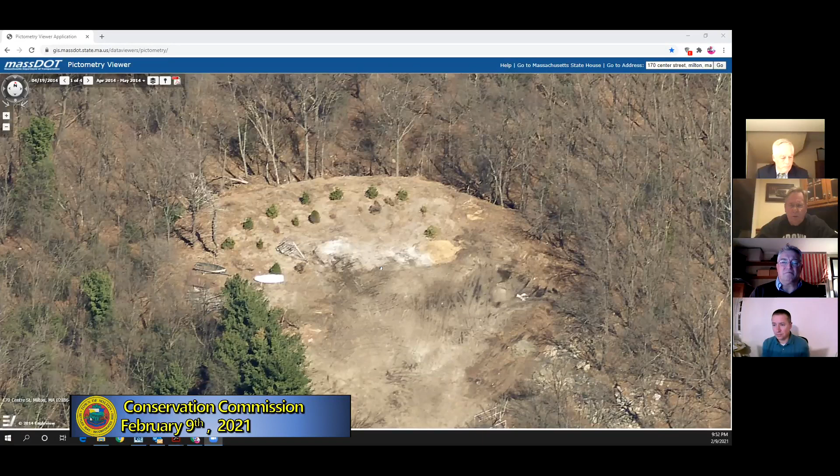Yeah, I don't think anybody's arguing that. It looks like some fill was brought here, Jerry. I'm not sure. Okay, so now if you go back to your original plan, if you would please. Yep. Stand by.

So at this tree line that you propose, what will the vertical be from the new topography when you remove all the dirt to make the slope of 2.5 to 1? What will be the height from this original level down to the new level?

So it would be the same height. Instead of being able to kind of hold your hand out and drop the rock, now you just have to throw it a little bit to get to that new toe.

So it won't be 16 feet or 10 feet? Well, the top of the slope is shown as 94, and the bottom of the slope is still 70. We've just taken it and stretched it out over a longer distance, so it's not as steep. Now it's going to be a much more manageable slope that you'd be able to establish vegetative cover on and plant.

But when we were out there, there was an 8-foot difference approximately from when you were standing closer to the blue line and looking up at the staging area. Yeah, so we're not proposing to do anything to the bottom or the top elevations. Those are staying the same. We're just proposing to separate them further apart to flatten that slope.

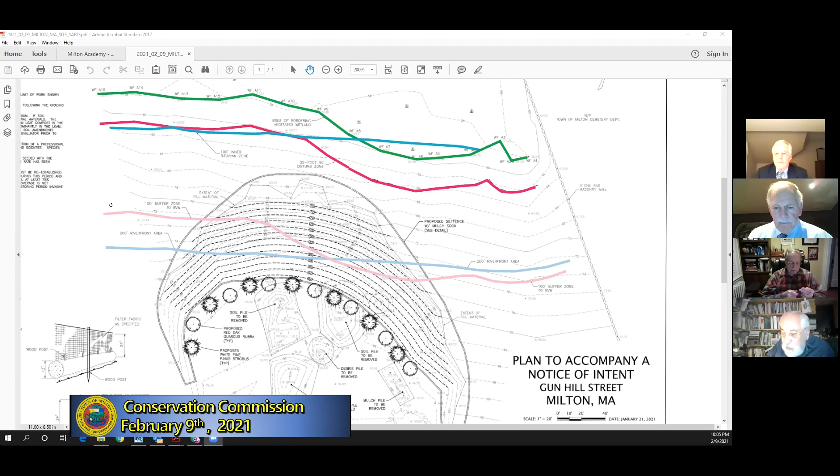When you talk about activity on campus, the change in impervious surface, would that have been upstream on the other side of Randolph Avenue? Yes, on the campus. I was picturing it happening on the cemetery side, as the cemeteries developed with roadways. We're going to be talking about removing some of those roadways, or impervious surface, in the next few years on the cemetery, so look for that improvement.

Are there other questions from commissioners? Earlier we were talking about fill covering the flare of the tree and going up the trunk, and Greg, you mentioned that in the recontouring process some of those trees would have to go. I'm curious what kind of trees they were. There's a lot of ash and a couple dead oaks. They all look like they're in trouble. As much as I'd like to tell the commission we're going to be able to save them, the reality is probably about 6 to 10 trees that look to be goners to me.

The school is certainly willing to put in more trees. I just want to put them in spots where it makes the most sense, and obviously they do too—they don't want to have to do it more than once. That's why I was hoping to get permission from this commission to work with Steve, if this is approved, after the area is stabilized with herbaceous cover, to find the best spots for trees and shrubs. That's why you don't see little A's, B's, and C's proposed. I think it's just too premature. Understood, and I'd like to be part of that conversation as well.

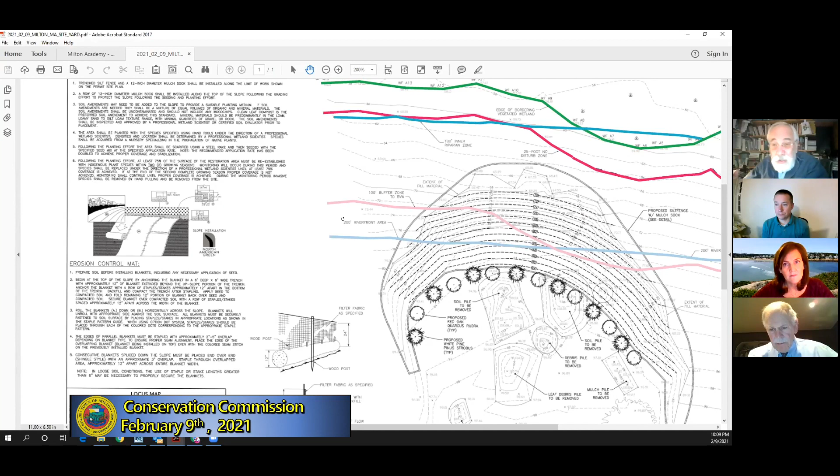So starting the slope there at the pink line and moving back at the 2.5 to 1 ratio from there. Under the regulations, which have been in place since 1972, the fill was done between 1972 and 1990, most likely. So bring it back and create additional buffer for animals. That would be my comment, if anybody asks. And you did, thank you.

Steve, you just kind of answered my question, and I was going to ask this of Greg. Just how far back outside the 100 foot will you have to go to ensure there's no indirect negative impact on the buffer zone? You're talking about plantings and new trees, but there's a lot of soil there, and I want to know how far back—you mentioned going back even further to get some of that fill. How far back can you go?

Jerry, if it's stable, you don't need more than a foot behind that pink line—just make it stable, that's all. Okay. The gentlemen and ladies on the big machines can do that. I've seen them do it in a number of places.

It's just a lot of soil to move, that's all. And Steve, you're suggesting no additional plantings, like a further back safety precaution area, where one line of trees is going to do it? You don't think there should be more in that area?

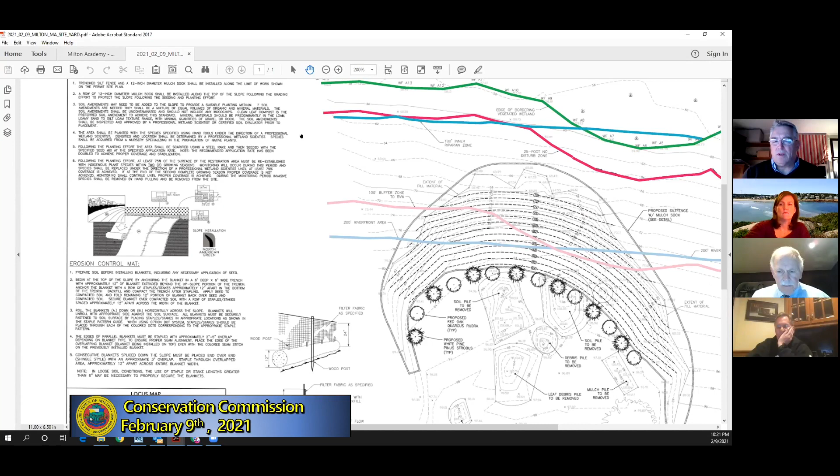If we do identify material that's in the risk category, it would have to be above what's called the reportable concentrations under the MCP. That characterization of data would have to address the critical exposure pathway and imminent hazard of significant release from migration, to be reported to DEP immediately. Conditions of a 2-hour, 72-hour, or 120-day notification would also apply for any analytical result that exceeded the S3 soil parameters under the MCP. So, in a wide breadth, we are characterizing material for hazard, disposal characteristics, and reportable conditions.

Good, all right. Thank you, that was a lot of information, Brandon. You asked if we were going to look at it, and I ran it through—so you did. Thank you, I've heard that now twice and I still have no idea what he said.

All right, so would you be able to give us some kind of a report from your perspective at our next meeting, which is March 9th? We give you time to talk to your folks to see what's doable.

Without repeating everything Brandon said, in terms of determining where the original elevation was of virgin earth, and then how to sample it. I know that's going to trigger your disposal obligations. The sampling we'd conduct would be for materials going off site, which require a waste characterization. Anything left on site would be used for future purposes, and that's where we'd conduct a test pit, because that material remains on site for any future use.

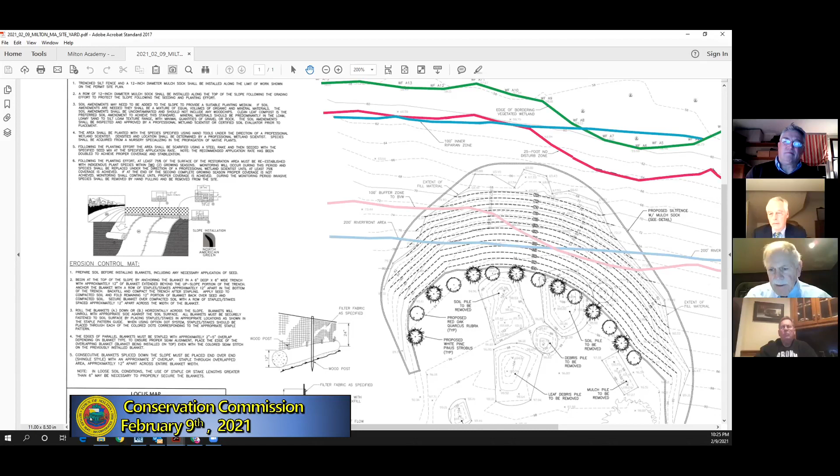I just had a quick question. I imagine we'd be able to consider the exploratory borings an exempt activity that wouldn't require an additional permit application? I believe that's appropriate. Although, Brandon, you did scare me.

Some of the machinations involved in getting to a stable place where you could actually do the boring. Well, we're probably only going 10 feet, we wouldn't be doing a boring, we'd just be using an excavator to do the work. As long as we can get a track tire to slope it down adequately along the edge, a 70-ton machine, Cat 235, I'll be able to reach and put holes in the ground in a sufficient number of locations to define existing, historical grade line or ground conditions. That's what I can imagine.

We'll have to trust your judgment because it's a fair question. I don't think you need a notice of intent to just do the test. But if you can do it with a boring, great; if you have to do a test pit, great. But you were talking about taking the hill down first and then doing the test. Yeah, I guess it's a reach issue, I just want to make sure we get material. If the commission's not uncomfortable with it, we could run the machine along the toe of the slope and dig upward.

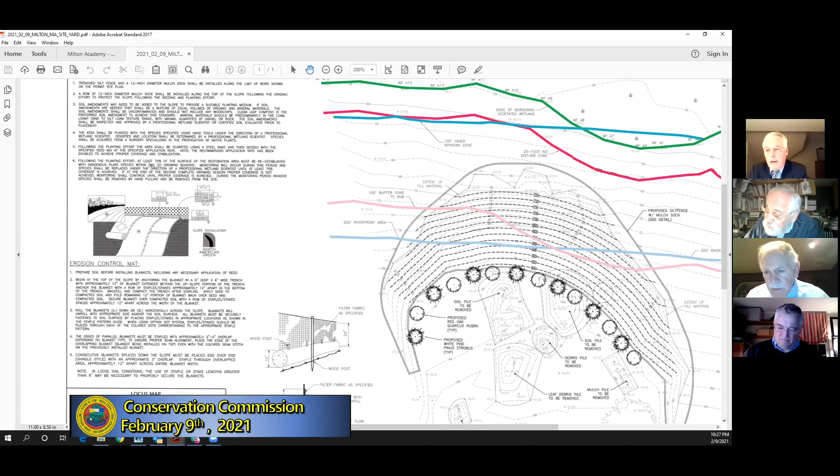John raised an issue: March 9th is the substantive start of the 40B hearing for the 648 Canton Avenue project, starting at 7:00 that night. He's representing the neighborhood in opposition to that project, and has a significant motion to be considered at the start of that hearing, so he may or may not be able to join the commission that evening, but feels they're in good hands with Greg and Brandon.

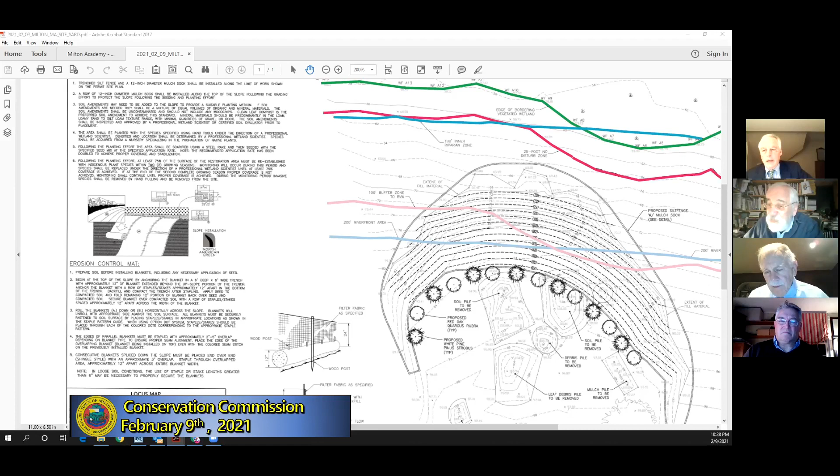That's understandable. The hearing could be lengthy, but if we can put you on the agenda nearer to the end, we can do that for you. That'd be great — we start at 7, and you're potentially back with the Ice House project that night too, so if we're behind that, there's a reasonable chance I could be in front of the commission in time.

Great, thank you very much. Thank you all. Thank you very much, have a good night. Good night, good night now.